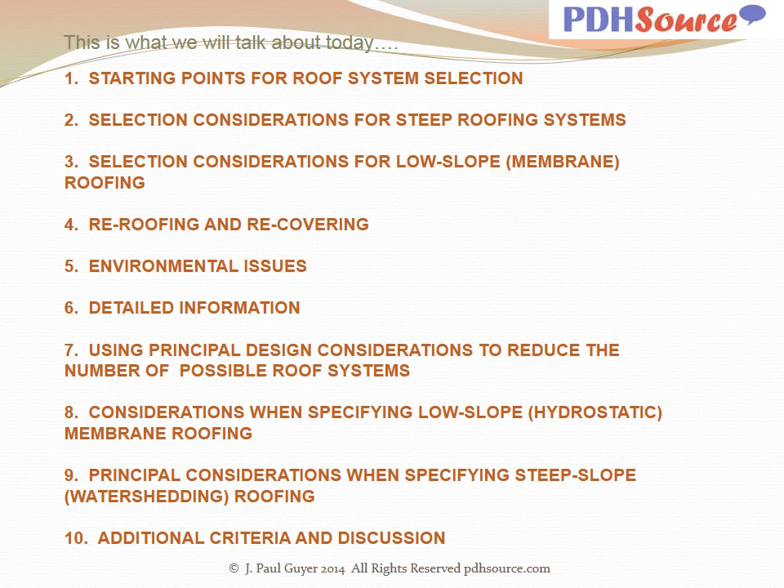By way of introduction, this is a little bit about me and what I've been doing for the last few decades. For 35 years, I was what I characterize as a straight-ahead designer, cranking out drawings and specifications for buildings and related infrastructure. I got registered in a few things along the way. And for an additional 9 years after that, I was in the public policy area as a principal staff advisor to the California legislature on capital outlay and infrastructure issues.

This discussion is intended to introduce the major considerations in selecting a roofing system. Figure 1, which you will see in a moment, depicts the various alternative roofing systems and how they relate. When commencing the selection process, there are two different starting points. Figure 1 indicates the decision process for arriving at the best roofing solution for your building.

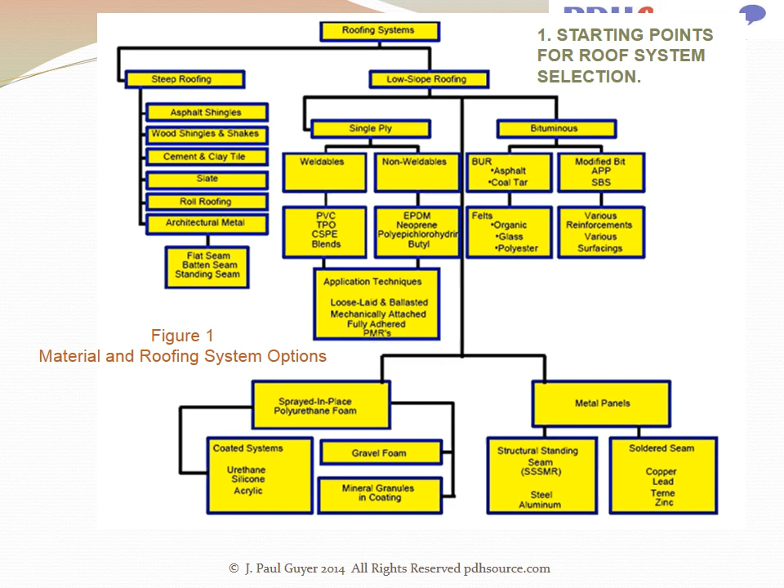There can be an issue, of course, whether you're talking about new roofing or re-roofing. The roof may be part of a new building design, or it may involve the re-roofing of an existing structure, either replacement or recovering.

Today, approximately 75% of roofing activity is re-roofing. In new construction, the designer is very likely to have a preconceived notion as to whether a highly visible sloped roof is wanted or whether a less visible low slope roof design is acceptable.

Positive drainage is a very important design criterion. When re-roofing, it may be feasible to improve drainage by using tapered insulation or sloped deck fills.

Table 1 evaluates common steep roofing systems based upon some use criteria. Steep roof systems make a strong visible statement about a building. The texture, shadow line, and color are major factors in selection. Steep roofs function by shedding water rather than by being waterproof. Figure 2 - minimum slopes, as shown in Table 13, are required in order to ensure proper drainage.

Major categories of steep roofing include asphalt shingles, wood shingles and shakes, tile, slate, architectural metal, asphalt roll roofing, and fabricated units of metal or plastic intended to look like the others. Only asphalt roll roofing and asphalt or wood shingles may be recovered.

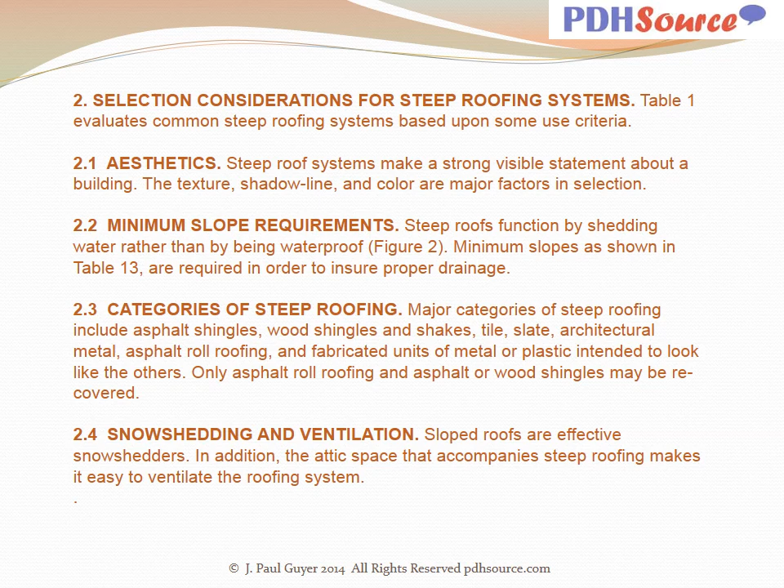Sloped roofs are effective snow shedders. In addition, the attic space that accompanies steep roofing makes it easy to ventilate the roofing system.

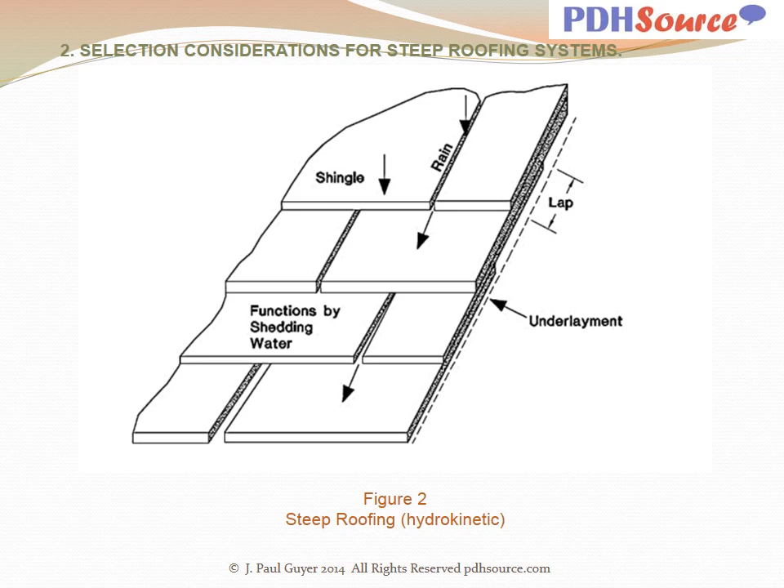Figure 2 indicates a typical steep roofing system, sometimes characterized as hydrokinetic. Figure 3 also indicates a low slope roofing system, commonly or sometimes characterized as hydrostatic.

Sloped roofs in general require less maintenance than flat roofing systems. When considering re-roofing a flat roof, it may be possible to convert the low slope roofing system to a steeply sloped roof. This may improve the appearance of the building while resolving drainage problems as well. Steep roof conversions are a viable option for relatively narrow buildings.

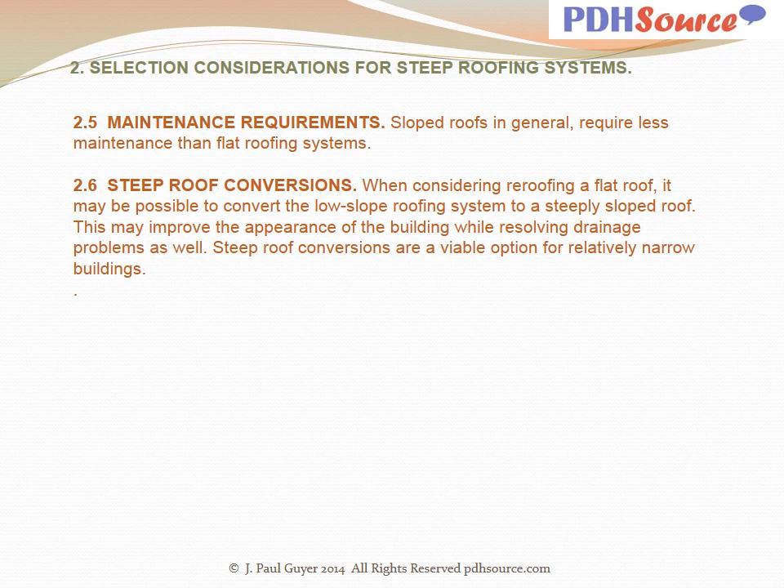Membrane roofing is typically used on commercial buildings where the minimum slopes required by steep roofing render them impractical for larger buildings. Low slope membrane systems are completely sealed at laps and flashings, figure 3, and can temporarily resist standing water conditions. Choices for membrane roofing include multi-ply bituminous built-up, abbreviated sometimes BUR, polymer modified bituminous, MB, elastomeric single-ply systems, EPDM, thermoplastic single-ply systems, PVC or TPO, sprayed in place polyurethane foam, SPF, and some metal, hydrostatic low slope SSSMR systems.

Designers frequently select low slope roofs when the roof is expected to accommodate rooftop equipment. With the exception of foam and metal, all low slope systems can be incorporated into protected membrane roof designs.

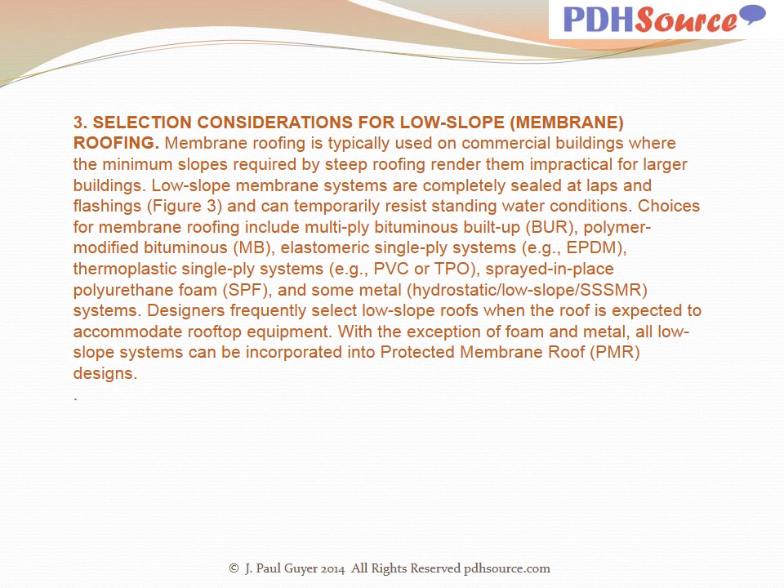The term replacement is used when the existing roofing system is to be either partially or totally removed and a new system installed. The designer should consider any existing problems and whether drainage and thermal performance needs to be improved. Existing surfaces such as walls and curbs may be contaminated with bitumen, which might affect compatibility with some re-roofing options.

Additional concerns as compared to new roofing include whether the existing structure can handle a significantly heavier roof system and whether construction activities of the re-roof system will affect the occupants of the building, such as fumes, falling debris, and noise.

The term recover is used when a new roofing system is to be superimposed directly over an existing system. In this case, underlying conditions are obscured, making assessment of their condition more difficult. Additional concerns include how the recover system will be attached to the existing membrane or roof deck and compatibility with the substrate. The potential for trapped water between the old and new membrane may suggest the use of venting base sheets and/or roof vents.

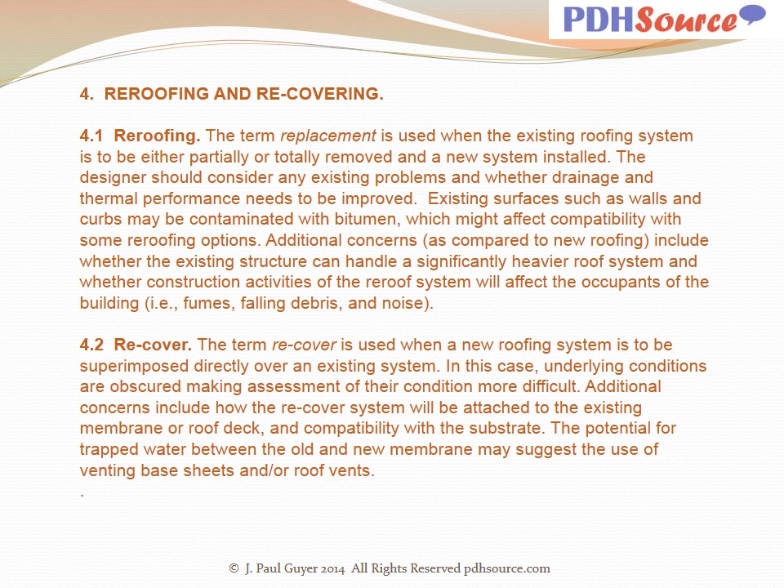A relatively new design criterion is whether the roof system under construction meets green criteria, such as whether the system incorporates post-consumer waste or is itself recyclable at the end of its useful life.

Roof system waste is bulky and puts a great strain on waste disposal sites. Energy efficiency is also important in terms of raw materials acquired, production of finished goods, and application of the roof system. Thermal performance in service and retention of thermal value with age are equally important.

A sustainable or robust roof is highly desirable as extension of the life of the roof contributes to overall conservation. High albedo, that is, reflective roofs, may improve localized climate conditions.

The felt used in asphalt organic shingles consists primarily of recycled waste paper, wood chips, and sawdust. Asphalt itself is a byproduct of petroleum refining. Wood fiber and perlite roof insulation contain waste paper.

Glass fiber and asphalt organic shingles have been recycled into asphalt curbing and the like. Wood shingles and shakes can be recycled into garden mulch. Steel and aluminum contain recycled scrap, and at the end of their life, metal panels can be recycled back into scrap.

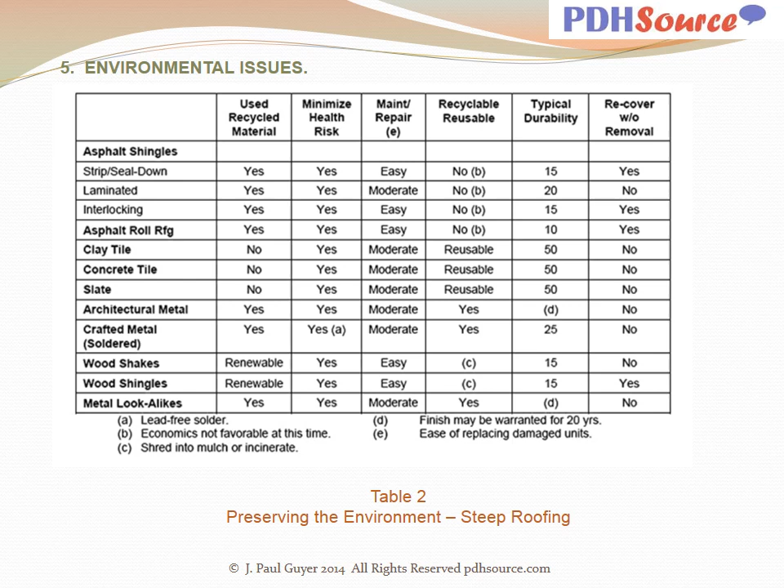Table 2 provides a comparison of environmental issues for different types of steep roofing systems. And Table 3 provides a comparison of a variety of low slope roofing systems and environmental issues of concern.

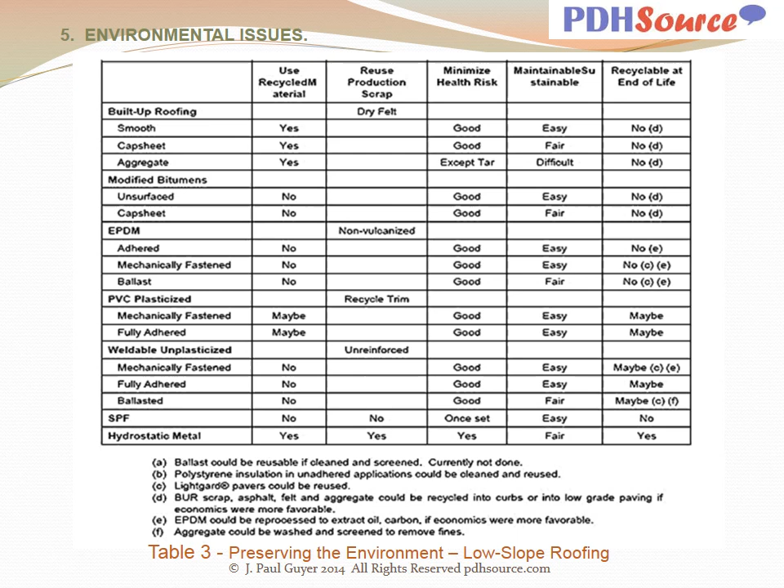Once a tentative roofing system selection has been made using information provided by this discussion, detailed information is developed.

Tables 4 and 5 list some of the principal design considerations in roof system selection. An explanation of the headings follows the tables. These tables are not all-inclusive but contain many criteria that the designer can consider to reduce the myriad of choices.

Systems that fail to meet the principal project design criteria can be quickly disqualified from further consideration. For example, if an existing structure has reached its design load limit, then heavier roofs, such as ballasted single-ply roofs or concrete tiles, would have to be disqualified, or the structure would have to be strengthened at significant cost.

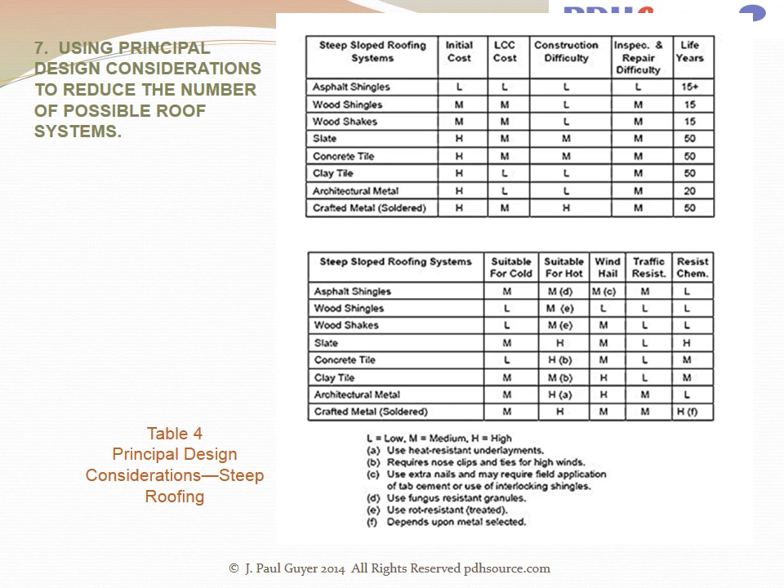The initial cost may include materials, labor, and special setup for construction. Initial cost may determine if the roof, as designed, is affordable. Perhaps a somewhat less expensive system should be considered if it does not incur significantly increased maintenance cost or have a shortened life. Life cycle cost considers durability, but also presumes that routine maintenance will be performed to achieve the projected life.

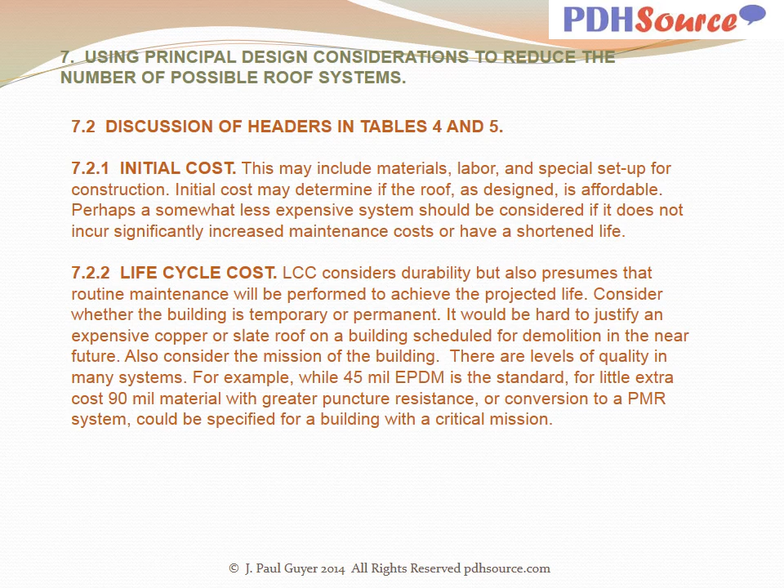Consider whether the building is temporary or permanent. It would be hard to justify an expensive copper or slate roof on a building scheduled for demolition in the near future. Also consider the mission of the building. There are levels of quality in many systems. For example, while 45 mil EPDM is the standard, for little extra cost, 90 mil material with greater puncture resistance or conversion to a PMR system could be specified for a building with a critical mission.

Some systems require more clearance to accommodate application methods and equipment. Large prefabricated roof sheets, 50 feet by 200 feet, may be fine on a large roof with few penetrations, but are impractical on a roof area that is broken up by many curbs and equipment supports.

On multiple penetration surfaces, relatively narrow sheets, i.e. BUR, MB, thermoplastic, single ply, or sprayed in place polyurethane foam should be considered.

Penetrations through standing seam metal roofing need to accommodate the expected thermal movement of the metal panels. Thermal movement is cumulative, increasing with distance from the point where the panels are restrained, which is typically the eaves.

Penetrations in standing seam metal roof panels must pass through the flat portion of the panel, not through the standing seam. Penetrations wider than a single panel require a diverter to carry water around the obstruction. Water must flow parallel to the raised seams, never over them.

Some roof systems require periodic recoating for weather protection. Aggregate surfaced roofs are more difficult to inspect and patch than smooth surfaced roofs.

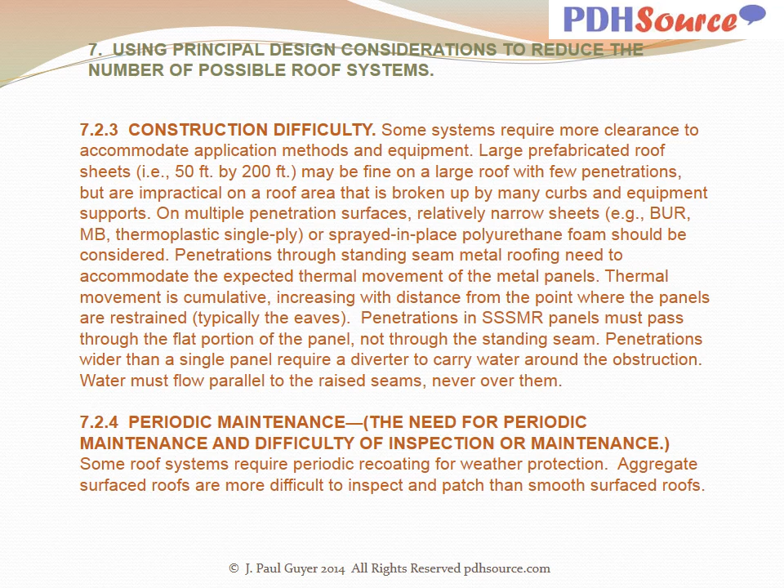A mean life is listed, but the actual life is affected by drainage maintenance and extreme use or abuse. Consider the effects of freeze-thaw, hail, ice scrubbing, and traffic while cold, such as snow removal. Some materials embrittle dramatically at low temperatures, meaning they have a relatively high glass transition temperature. Others may embrittle as they weather and lose plasticizer, or are degraded by ultraviolet or thermal loads.

H indicates highly suitable, L indicates less suitable. Effects of thermal expansion and algae growth are considered in the suitability ratings for extremely hot or humid conditions, with H indicating suitable and L indicating less suitable.

With regard to wind resistance, roofs are vulnerable to wind scour and blow-off. While arbitrary ratings are provided in the tables, resistance is affected by building height, terrain, parapet height, and measures taken to upgrade perimeter and corner attachment. In the tables, H indicates highly wind resistant when properly designed.

For membrane roofing, impermeable roof decks such as cast-in-place concrete are best. Air retarders are needed with loose-laid and mechanically fastened single-ply systems, as they may otherwise balloon from interior air leakage. Perimeter wood blocking must be well anchored to prevent peeling of the membrane or loss of fascia metal.

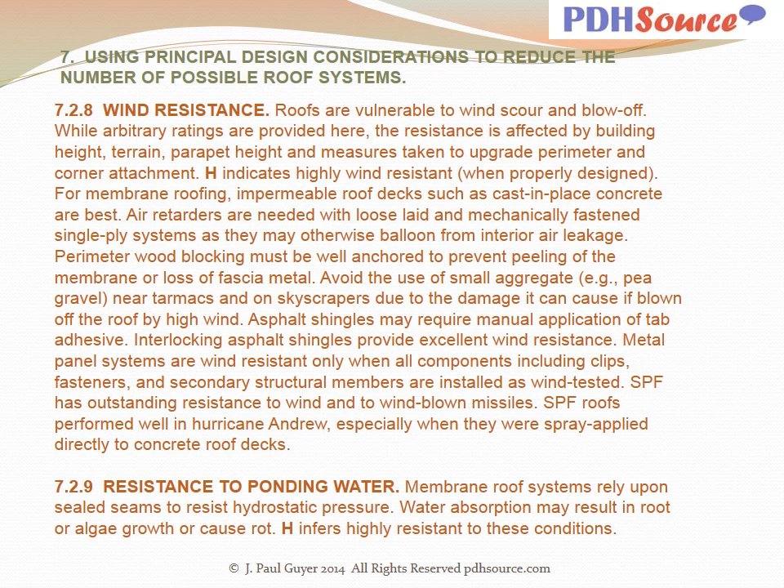Membrane roof systems rely upon sealed seams to resist hydrostatic pressure. Water absorption may result in root or algae growth, or cause rot. In the tables, H refers to systems highly resistant to these conditions.

Roofs that have a lot of rooftop equipment will have foot traffic that can cause punctures or abrasion. Most roof systems are available with traffic protective overlays, such as walkways. In the tables, H indicates systems highly resistant to abuse, assuming protective courses have been applied.

With regard to resistance to chemicals, including oils, fats, grease, and metal ions, some roof surfaces are vulnerable to exhaust fumes or liquids. Thermoplastic polyolefins (TPOs) and hypalons (CSPE) may be better than bituminous materials in resistance to oils, greases, and solvents. Copper-containing runoff water from condensate coils or flashings will corrode zinc and zinc-aluminum SS-MR roofing. In the tables, H indicates better than average resistance to attack.

Consider the total number of roofs already installed, the weight of the proposed roof system, and possible construction loads. The unit weight of membrane systems varies dramatically, ranging from less than 0.5 pounds per square foot for 2-inch thick SPF roofing, to more than 20 pounds per square foot for ballasted single-ply systems. Typical roof system weights and construction loads are shown in Table 6.

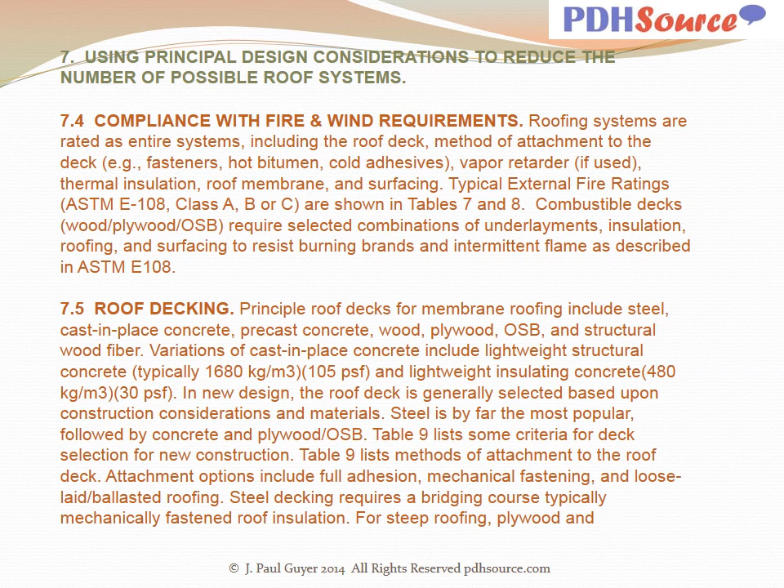Attachment options include full adhesion, mechanical fastening, and loose-laid ballasted roofing. Steel decking requires a bridging course, typically mechanically fastened roof insulation. For steep roofing, plywood roof decks are most common. They generally utilize flexible batts as under-deck roof insulation, although architectural metal and cathedral ceiling constructions may use rigid insulation above the deck.

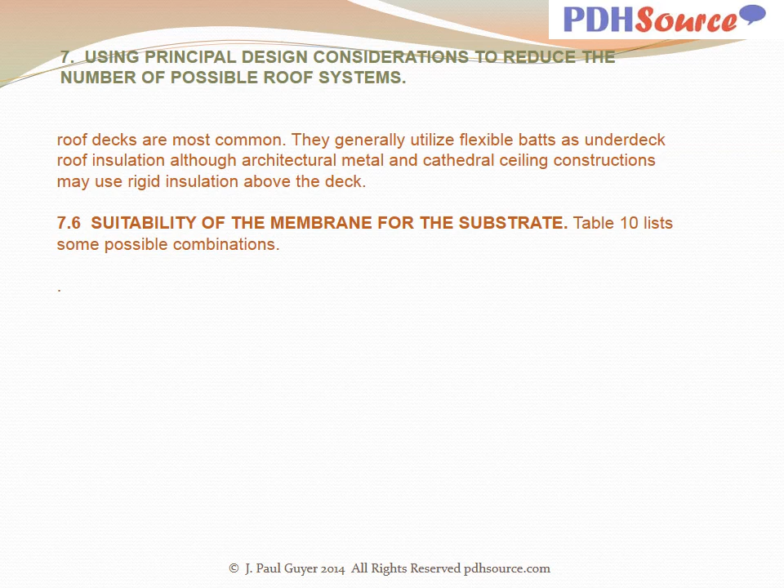Table 10 lists some possible combinations of suitability of the membrane for the substrate. Table 6 indicates typical weights of roofing materials and equipment.

Table 7 indicates fire ratings and required underlayments for steep-sloped roof systems. The roofing systems are indicated in the first column, the ASTM E108 class in the center column, and the underlayment in the column on the right.

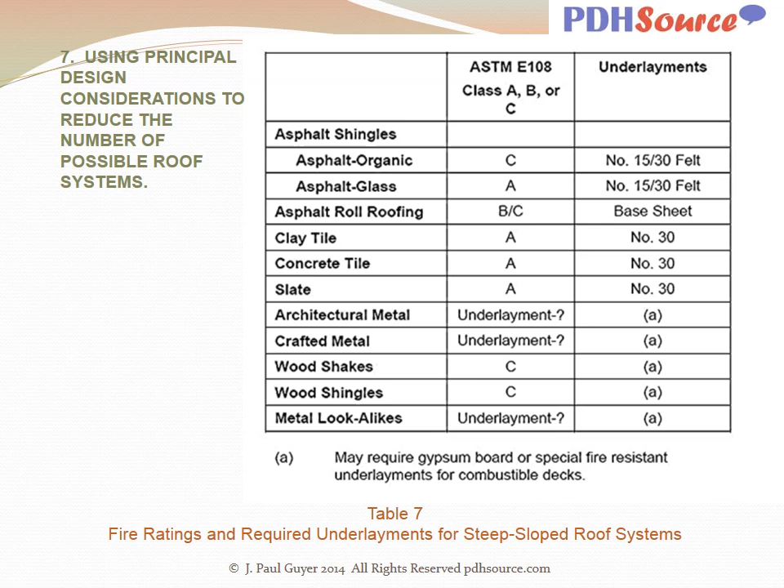Table 8 provides fire ratings and required underlayments for low-slope roof systems. The roofing systems are indicated in the first column on the left, the ASTM E108 ratings in the second column for combustible decks, and in the third column for non-combustible decks, with the deck construction indicated in the column on the right.

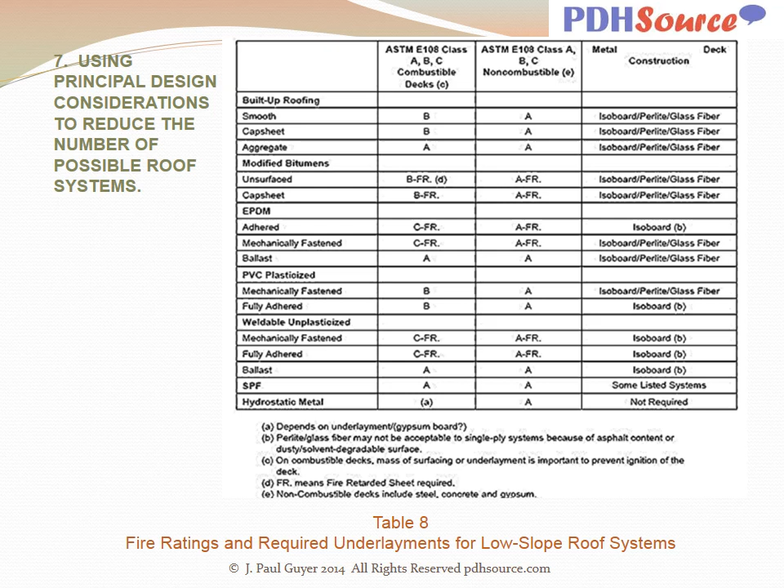Table 9 indicates the suitability of roof decks for various conditions: economy, long spans, resistance to heavy roof traffic, seismic, internal fire resistance, external fire resistance, and wind resistance. The roof decks considered are in the first column on the left, with qualitative ratings ranging from excellent down to poor.

Table 10 indicates membrane substrate compatibility and attachment methods.

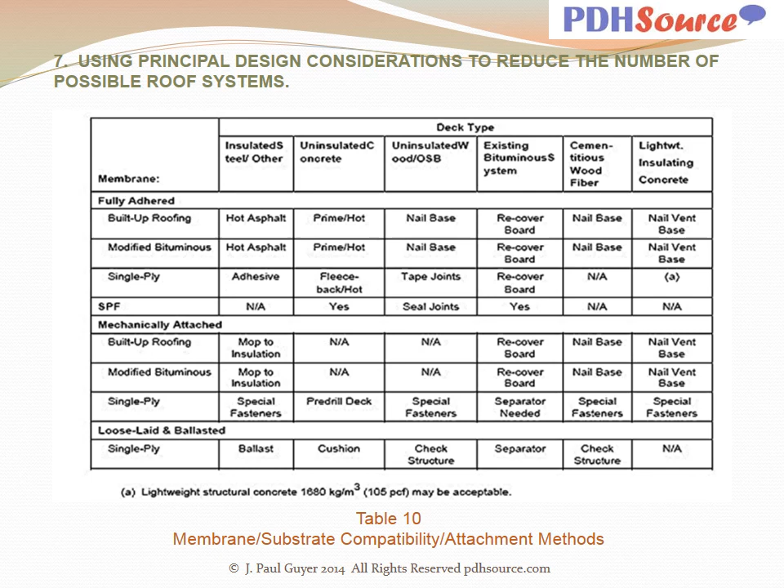Rigid thermal insulations used under membrane roofing include wood fiber, perlite fiber, glass fiber, foamed glass, polystyrene (either extruded or expanded), and polyisocyanurate isoboards. Non-structural thermal insulations include glass fiber and mineral wool batts, and blown loose insulations such as cellulose fiber, glass fiber, mineral fiber, and expanded vermiculite.

Table 11 indicates the suitability of rigid roof insulations for membrane roofing based upon the intended method of use.

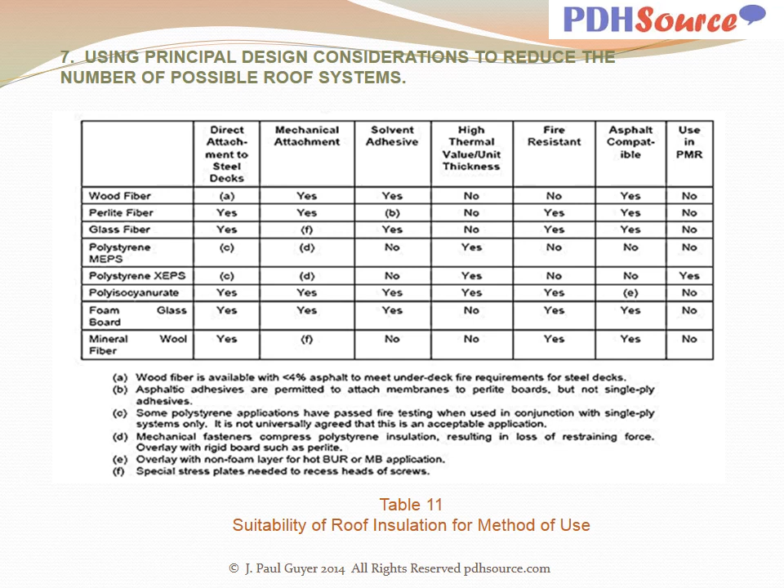If thick layers of insulation are needed to meet a high thermal resistance, thicker wood nailers and deeper fascia metal will be required. Foam plastics such as polyisocyanurate and polystyrene have the highest R-values per unit thickness.

In standing seam metal roof systems, the permissible thickness of blanket insulation may be limited by the clearance provided by the supporting clip design. Blanket insulation used in steep roofing systems is frequently placed on the floor of the attic, where R-values of 30 or more may be possible.

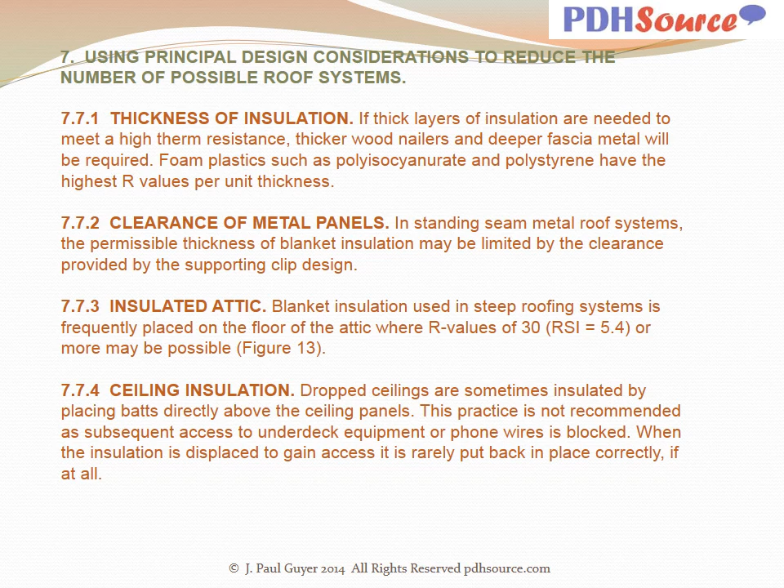Drop ceilings are sometimes insulated by placing batts directly above the ceiling panels. This practice is not recommended, as subsequent access to under-deck equipment or phone wires is blocked. When the insulation is displaced to gain access, it is rarely put back in place correctly, if at all.

With regard to suitability for extreme climates, protected membrane systems (PMRs) are very well suited to extremely cold climates and have been successfully used in all climates.

For extreme conditions of snow and ice, a cold, ventilated roof should be considered. For most steep roofing, this is achieved by allowing a flow of outdoor air between the insulation and the roofing deck. This air cools the roof in summer, dries out any moisture that condenses in the roof, and greatly reduces the formation of icicles and ice dams along the eaves.

For regions prone to severe hail, ballasted EPDM roofs are very good and PMRs are excellent. Tile, shingles, and bare BUR and metal systems are easily damaged by hail.

In regions of semi-tropical climate with high temperatures and humidity, asphalt shingles should be treated to be fungus resistant, and wood shakes and shingles should be pressure treated for rot resistance.

Most membrane systems are difficult to install in sub-freezing weather. If frequent precipitation during construction is a problem, factory fabricated single-ply systems with field-welded seams may have advantages over systems where field application of adhesives or hot bitumen is needed. Torch-applied modified bitumens are one of the few systems that can be applied, albeit slowly, in wet, windy conditions.

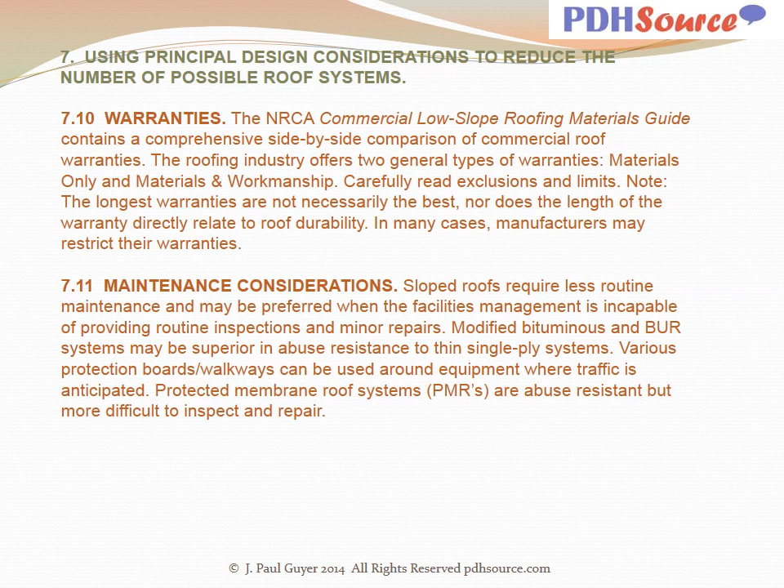Various protection boards and walkways can be used around equipment where traffic is anticipated. Protected membrane roof systems are abuse resistant but more difficult to inspect and repair.

There may be issues of roof access, fumes, and property protection when re-roofing. With regard to fumes, those from kettles and solvents may be objectionable. Hot coal tar pitch is especially objectionable.

Hot asphalt is also noticeable but less noxious. Cold applied systems with taped or welded seams and metal roof systems generate few odors. It may be necessary to coordinate air conditioning shutdown to avoid taking fumes into the occupied building. If the area around the construction site is congested, it may make heating and hoisting of roofing materials difficult.

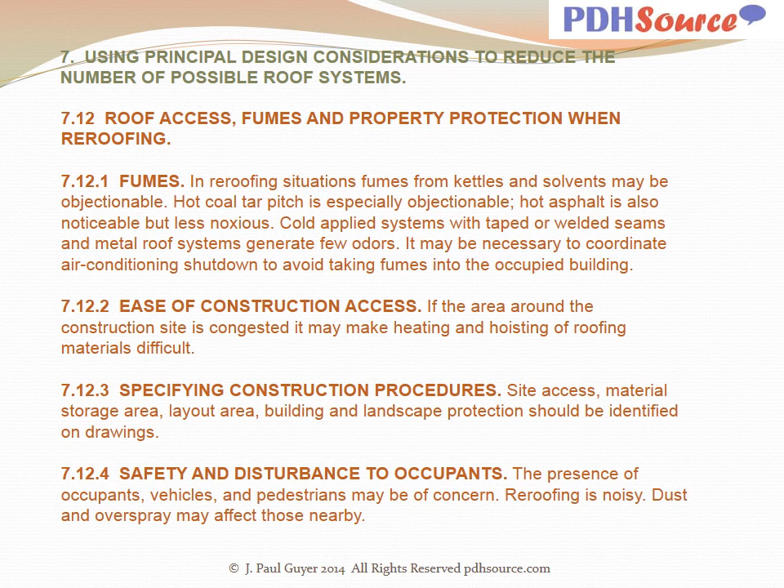Site access, material storage area, layout area, building, and landscape protection should be identified on drawings. The presence of occupants, vehicles, and pedestrians may be of concern. Re-roofing is noisy, and dust and overspray may affect those nearby.

Roofing requires skilled installers. Qualified contractors and inspectors are more likely to be available if the system is customarily used in the region. It should be determined whether there are several manufacturer-approved installers capable of bidding the work. Verify that the contemplated system is acceptable to the owner, occupants, and maintenance personnel.

With the exception of SSSMR, membrane roofing requires a suitable roof deck. Most constructions will also use thermal insulation. Vapor retarders are sometimes required to protect the roofing system from attack by moisture from the interior.

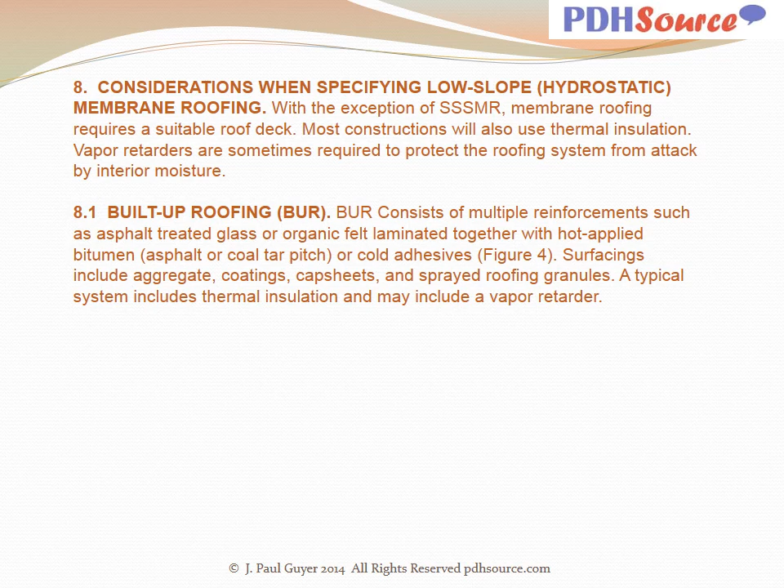Built-up roofing, BUR, systems consist of multiple reinforcements such as asphalt-treated glass or organic felt laminated together with hot-applied bitumen, asphalt or coal tar pitch, or cold adhesives. See Figure 4. Surfacings include aggregate coatings, cap sheets, and sprayed roofing granules. A typical system includes thermal insulation and may include a vapor retarder.

MB, polymer modified bitumen, consists of reinforced sheets factory coated with polymer modified bitumen. They may be laminated in the field using hot bitumen, heat fusion, or by cold adhesives. Refer to Figure 5. Surfaces include cap sheets with mineral granules, metal foil, and field-applied coatings.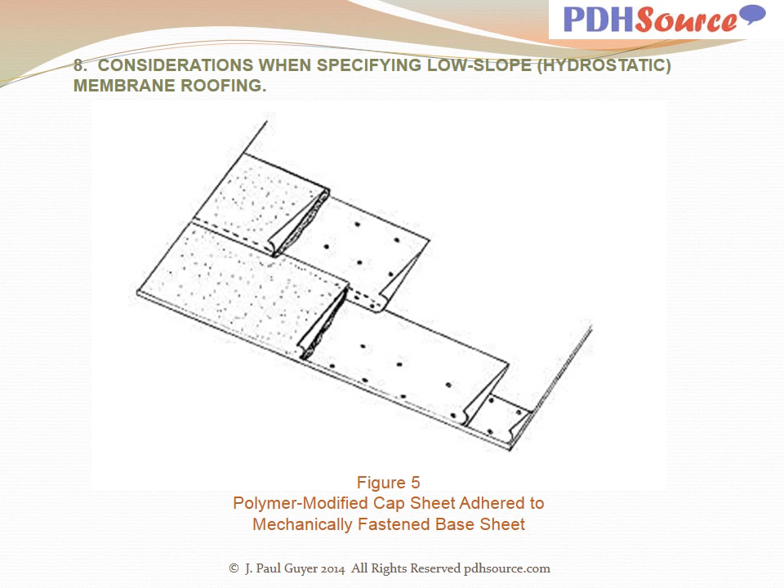Elastomeric single-ply membranes consist of a factory-produced sheet, generally of EPDM rubber, with seams field sealed with adhesive or tape. Refer to Figure 6. Sheets are unsurfaced unless ballast is used. Elastomers are vulcanized, thermoset, and usually non-reinforced except when used in mechanically fastened systems.

A fleece-backed sheet is also available for fully adhered systems when it is desired to use hot bitumen as an adhesive, for example, for recovering an asphalt-contaminated deck or old built-up roofing system, BUR. Figure 6 indicates a typical EPDM roof system.

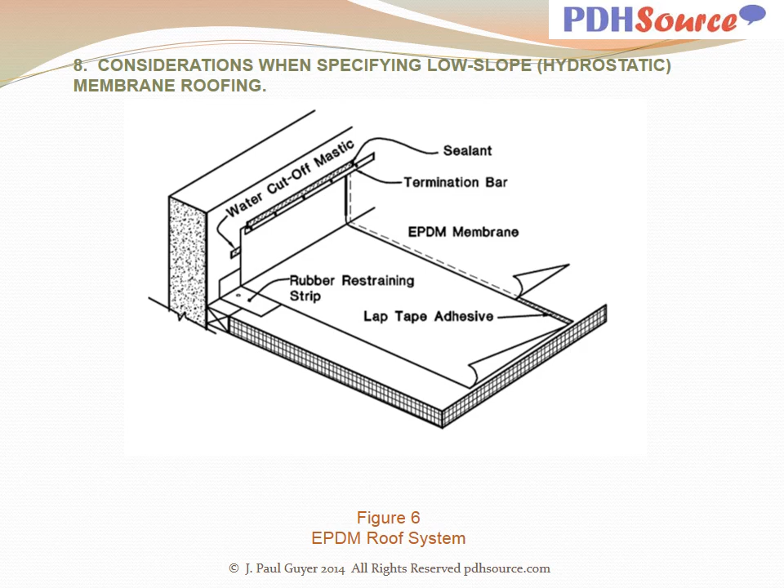Figure 7 indicates a typical PVC roof system.

Weldable thermoplastic membranes consist of a sheet of reinforced thermoplastic material such as PVC or TPO. Sheets are unsurfaced or ballasted. Seams are generally heat fused, although solvent welding and adhesive bonding are also possible. Refer to Figure 7.

Structural standing seam metal roofing, SSSMR, consists of metal panels with raised seams more than 1.5 inch high. Refer to Figure 8. Sealants are utilized at side seams and end laps to provide waterproofing.

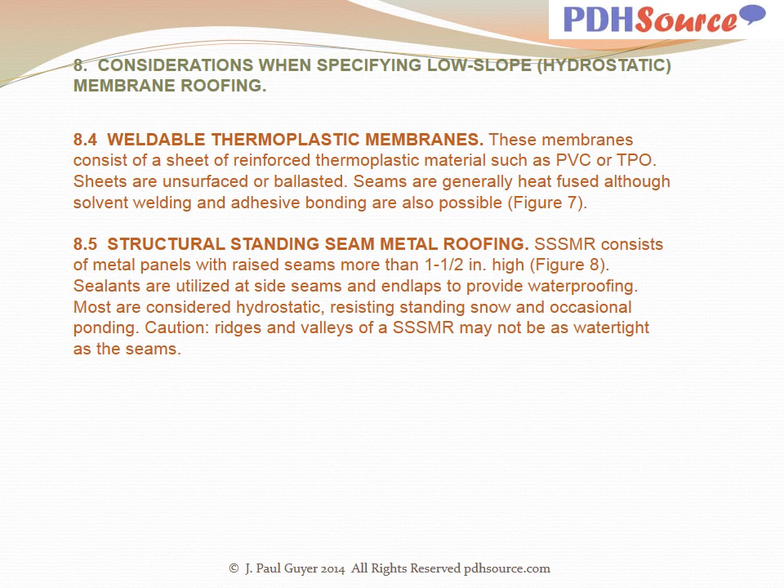Most are considered hydrostatic, resisting standing snow and occasional ponding. A word of caution: ridges and valleys of structural standing seam metal roofing may not be as watertight as the seams. Figure 8 indicates typical structural standing seam metal roofing systems.

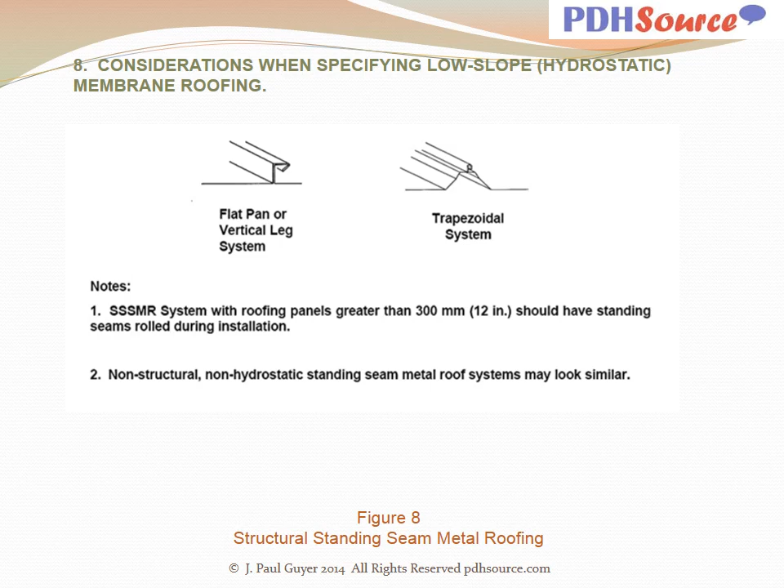SPF, sprayed-in-place polyurethane foam systems, is a thermoset rigid foam field formed by the reaction of liquid components in the presence of a foaming agent sprayed onto the substrate. SPF is protected by liquid applied elastomeric coatings or an application of loose gravel on slopes less than 4%. Figure 9 indicates the typical elements and components of membrane roofing systems.

The components of membrane roofing systems: first, the deck, which supports the roofing loads and is selected to conform to fire-resistant design classifications. Not all systems require a deck, for instance, structural standing seam metal roofing.

A vapor retarder protects the insulation against moisture vapor attack from the warm, high vapor pressure side of the roof assembly. Not all buildings require a vapor retarder. An air barrier prevents air movement, infiltration, and exfiltration through the roofing system.

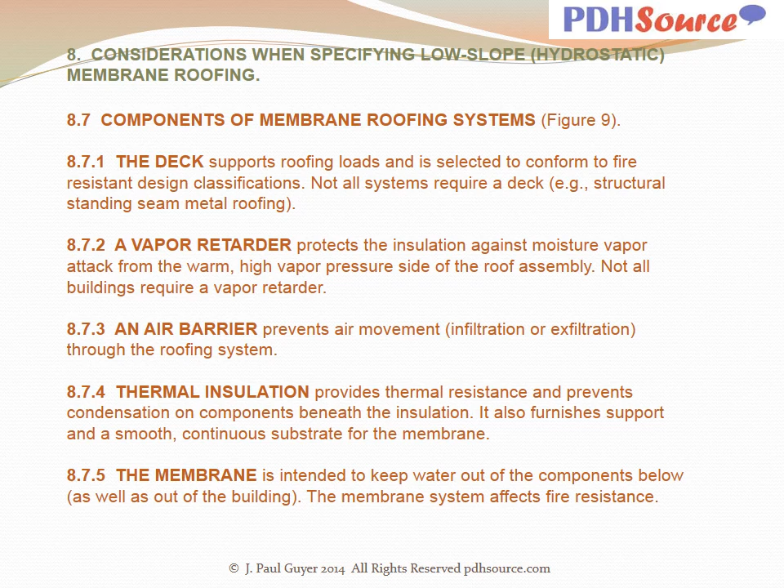Thermal insulation provides thermal resistance and prevents condensation on components beneath the insulation. It also furnishes support and a smooth, continuous substrate for the membrane. The membrane is intended to keep water out of the components below as well as out of the building. The membrane system affects fire resistance.

Individual roofing components may be held in place by adhesives, fasteners, ballast, or a combination of these methods. Perimeter flashings are waterproof vertical terminations of the membrane. Refer to Figure 10.

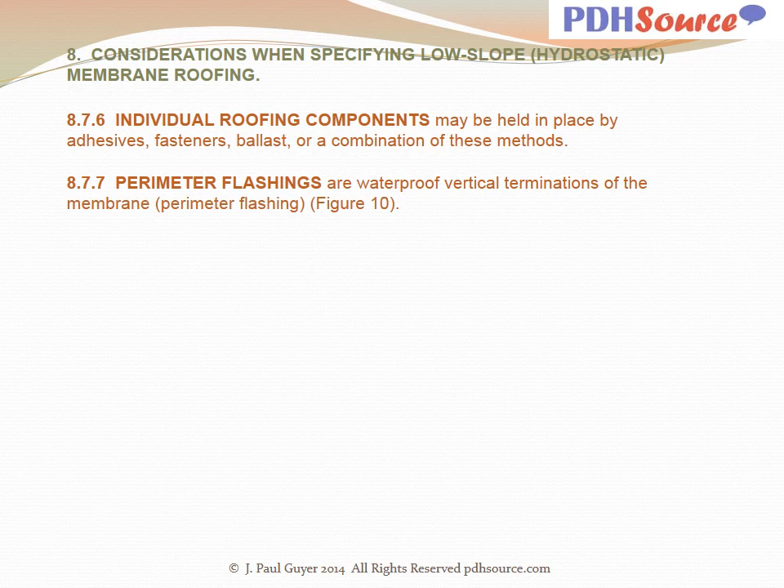Figure 10 indicates representative wall base and cap flashing. Roof edging and fascia are usually low profile roof edge terminations and side trim. Roof penetrations include drains, vents, curbs, equipment supports, and the like. Surfacing materials screen UV light, improve fire ratings, and may improve water and/or hail resistance.

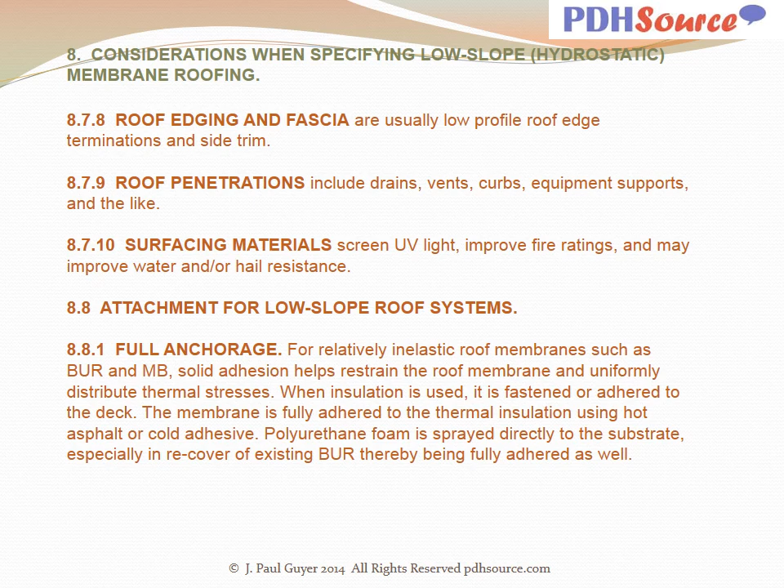With regard to attachment for low-slope roof systems, first, full anchorage. For relatively inelastic roof membranes such as BUR and MB, solid adhesion helps restrain the roof membrane and uniformly distribute thermal stresses. When insulation is used, it is fastened or adhered to the deck. The membrane is fully adhered to the thermal insulation using hot asphalt or cold adhesive. Polyurethane foam is sprayed directly to the substrate, especially in recover of existing BUR, thereby being fully adhered as well.

In partially attached systems, the membrane is mechanically anchored through the insulation into the deck, or in a few cases, partially adhered with strips or spots of adhesive. This is common with flexible single-ply roof membranes. Fasteners are typically placed in the seams area where it can be covered by the overlapping sheet.

For loose laid systems, the membrane is unattached to the substrate and is held in place by ballast. Restraint is required only at perimeters and curbs. Loose laid roofs are used with elastomeric EPDM systems and some thermoplastic TPO systems. These are very inexpensive roof systems if the structure can handle the ballast weight. A word of caution: in positive pressure buildings, air barriers should be used with loose laid and partially attached membranes to avoid billowing and peeling.

With regard to labor costs, the labor costs are highly intensive with the BUR and MB systems, highly intensive with the structural standing seam metal roof systems. The system is very unforgiving of installation defects, however. Medium intensity systems are fully adhered and mechanically fastened single ply, and low intensity from the standpoint of labor is spray foam, which requires the smallest crew but is the most machine intensive and weather sensitive.

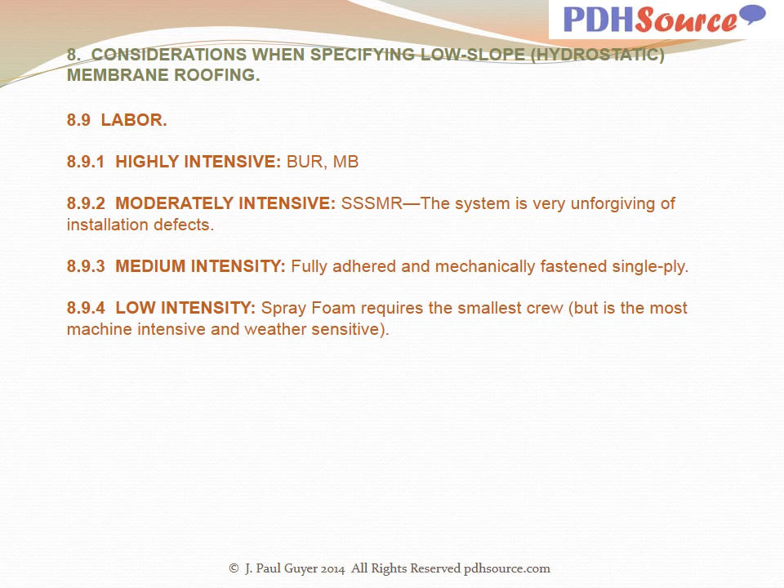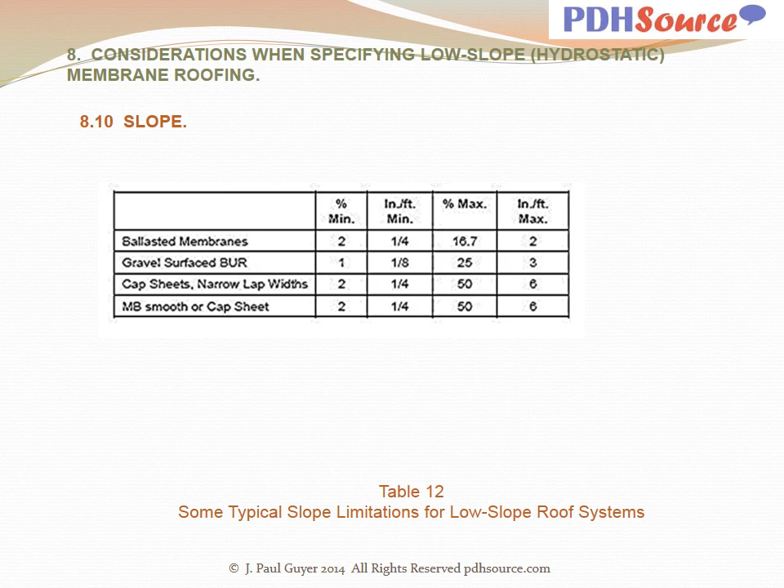With regard to principal considerations when specifying steep slope, water shedding roofing, this category covers systems that range from asphalt shingles, wood shingles and shakes, clay and concrete tiles, slate and metal lookalikes. Also included are architectural metal panels with a variety of seams, referred to Figure 11. Slopes are generally 25%, 3/12 or greater. Most must be continuously supported on a solid deck, for example plywood or oriented strand board, OSB.

However, some varieties, clay and concrete tiles, may be supported on spaced horizontal batten boards. Underlayments such as roofing felt, self-adhering MB, or plastic film are usually required over the entire roof to provide a secondary line of defense against driving rain and blowing snow. In cold regions, a completely sealed MB underlayment is needed along eaves, in valleys, and at dormers, skylights, chimneys, and such to resist leaks from water ponded behind ice dams.

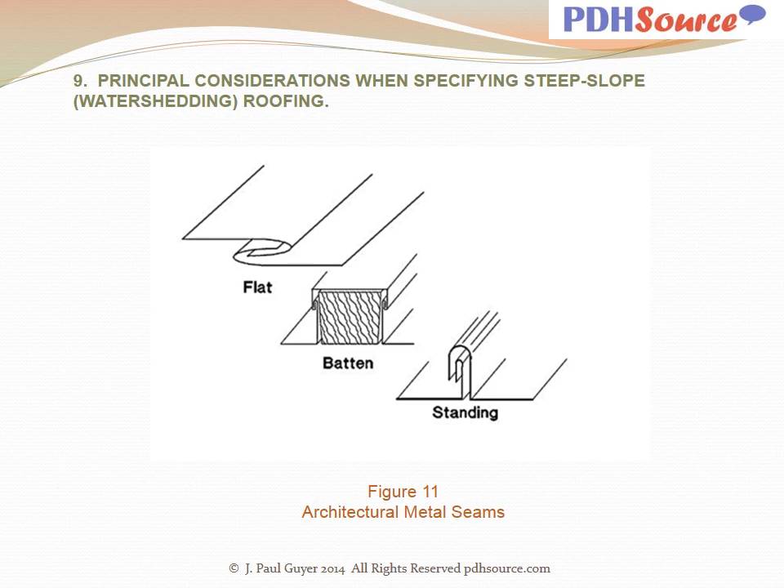With regard to aesthetics, by their very nature, steep roofing is highly visible. Appearance may be of primary concern to the designer. Regional preferences exist. For example, red tile roofing is very common and highly desirable in the Southwest, while light gray concrete tile is preferred in Florida. Wood shakes give a textured, natural look preferred in the Pacific Northwest. Labor intensity and labor skill.

High intensities are heavy brittle units of clay, tile, or slate. Medium intensity of labor is architectural metal and wood shakes, and then low intensity is shingles.

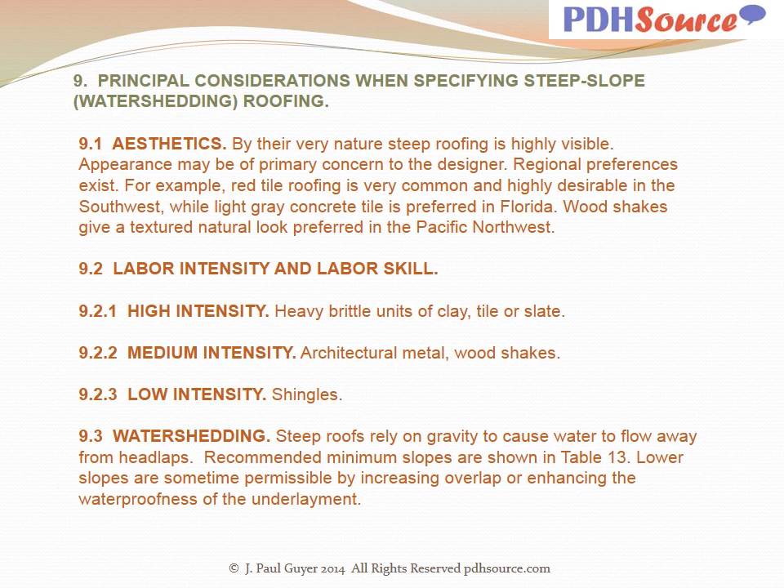Valleys must be well constructed. The slope of a valley will be less than that of the intersecting planes that form it. Exterior drainage over the roof edge or to a gutter is typical, but may be troublesome in cold regions since ice dams may form there.

Sealed underlayments of self-adhering modified bitumen are typically used along the eaves to at least 24 inches beyond the interior wall line, refer to Figure 12A, and as valley lining. Occasionally, the entire roof deck is covered with such a membrane. Note that this can lead to problems if indoor moisture is not isolated from the roof by well-made vapor and air barriers. Underlayments are used in steep roofing as a secondary defense against water penetration.

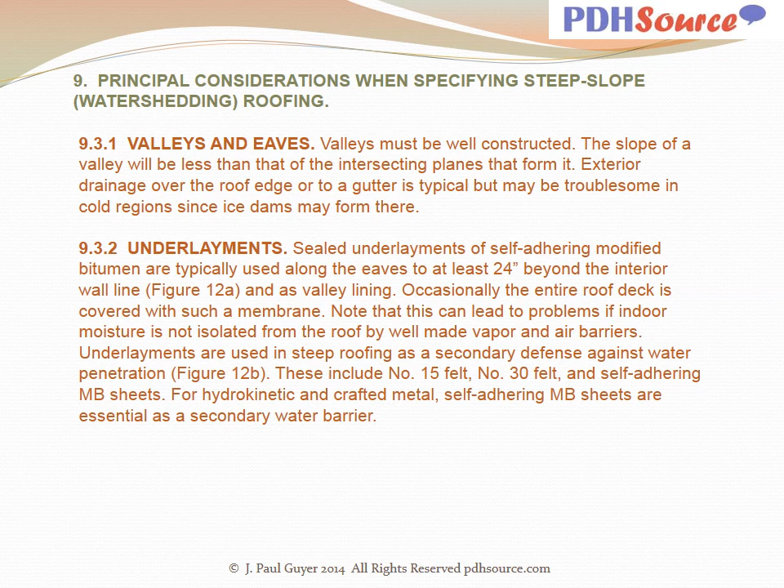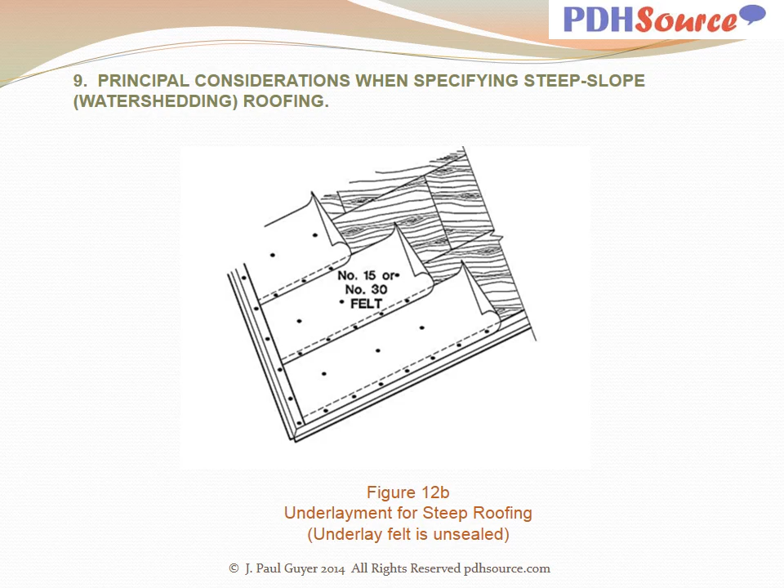Steep roofs generally cover an attic space, refer to Figure 2-13, with the exception of cathedral ceilings. The floor of an attic can be inexpensively insulated with non-structural insulations such as fiberglass batts, mineral wool, and expanded vermiculite or treated cellulose. Where the thickness of the insulation is not limited by clearance problems, very high thermal resistances, i.e. R30, can be achieved.

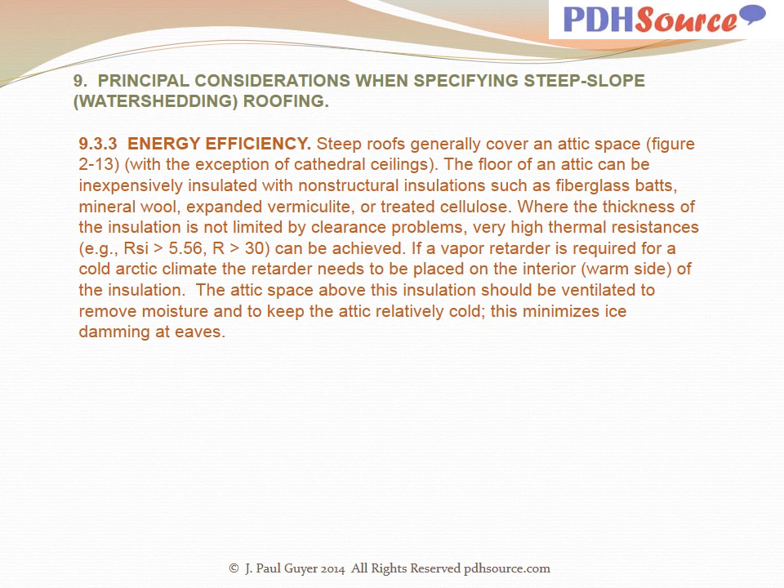If a vapor retarder is required for a cold Arctic climate, the retarder needs to be placed on the interior warm side of the insulation. The attic space above this insulation should be ventilated to remove moisture and to keep the attic relatively cold. This minimizes ice damming at eaves.

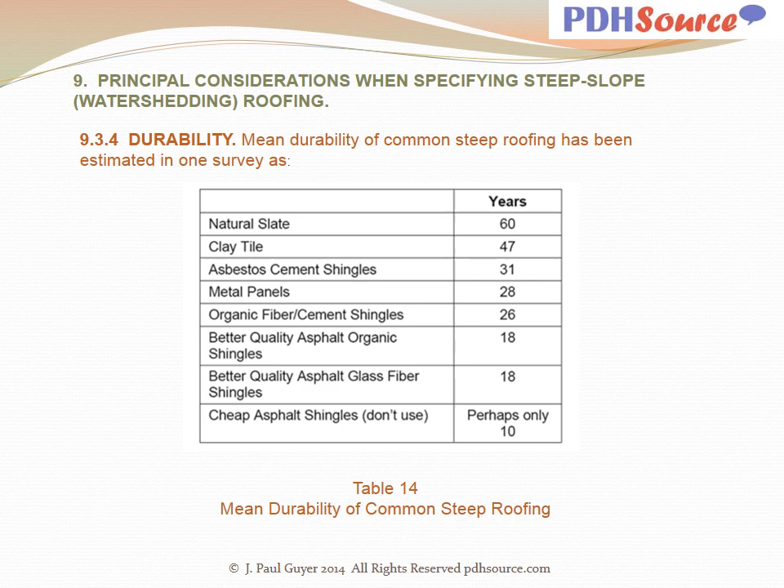Maximum wind speeds associated with locality and storm type determine the needed wind resistance. ANSI/ASCE 7-95, and others provide design information.

Air impermeable roof decks such as poured concrete with adhered or mechanically fastened insulation and fully adhered membranes are highly wind resistant. Tests conducted by the Factory Mutual system have determined that BUR systems installed this way have resisted 180 PSF.

Metal panels are generally rated by the Underwriters Laboratories UL 580 procedure, with UL 90 ratings considered excellent. However, because some SSS-MR panel systems with UL 90 ratings have failed in service, structural standing seam metal roof systems must pass the ASTM E1592 test method.

Ballasted single-ply systems rely on heavier and larger ballast in more wind-prone exposures. SPRI has developed wind guidelines in their ANSI SPRI RP4 document based upon ANSI/ASCE 7-95 guidelines. Higher parapets have a beneficial effect on ballasted systems. Above certain building heights, SPRI recommends against the use of ballast.

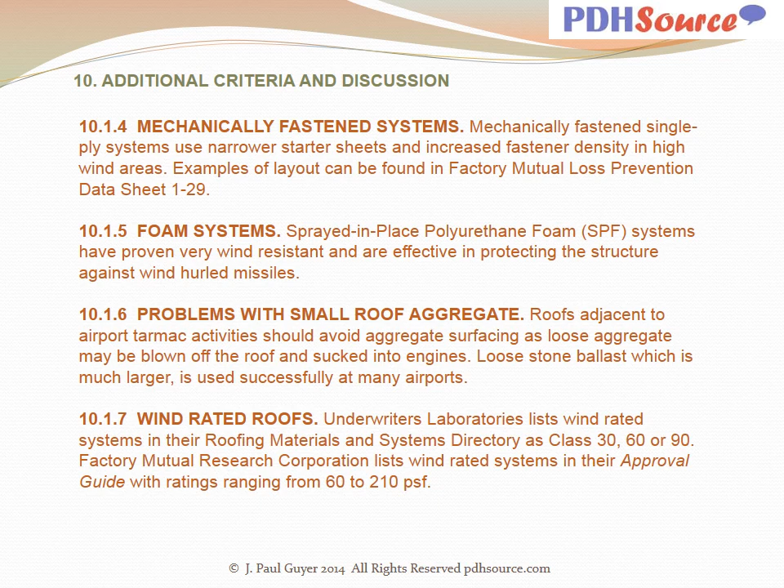Underwriters Laboratories lists wind-rated systems in their roofing materials and systems directory as class 30, 60, or 90. Factory Mutual Research Corporation lists wind-rated systems in their approval guide with ratings ranging from 60 to 210 pounds per square foot.

For most steep roofing systems, additional fastening is required for high wind areas, that is, 6 fasteners per asphalt shingle instead of 4, addition of nose clips for tiles, etc.

The formation of ice can cause the roof membrane to split. Ice can also affect roofing performance by scrubbing the membrane and eroding the surface. This can be especially detrimental to materials with a relatively high glass transition temperature. Bituminous materials have a TG of approximately 32 degrees Fahrenheit.

Modified bituminous materials with an SBS modifier can have a TG as low as minus 30 degrees Fahrenheit. EPDM membranes report a TG less than minus 40 degrees Fahrenheit. The TG of thermoplastics may increase with age, that is, loss of plasticizer in PVC.

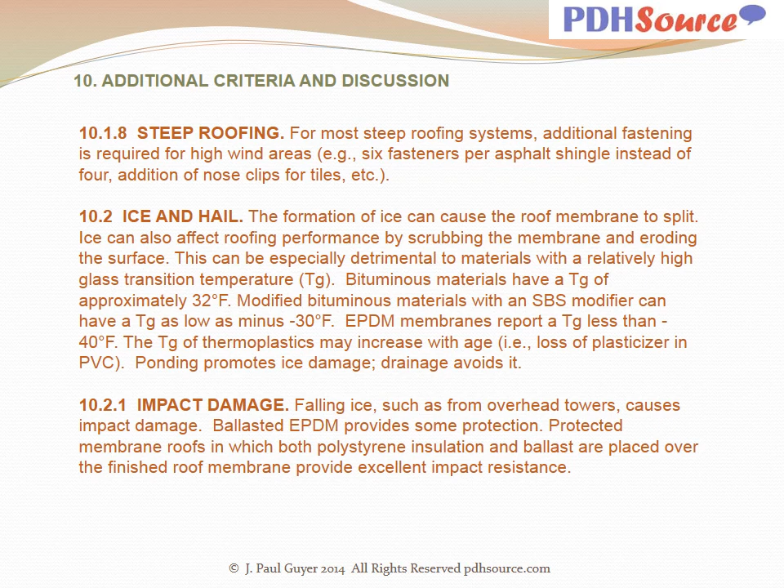Ponding promotes ice damage, drainage avoids it. Falling ice, such as from overhead towers, causes impact damage. Ballasted EPDM provides some protection. Protected membrane roofs, in which polystyrene insulation and ballast are placed over the finished roof membrane, provide excellent impact resistance.

Ice formation at eaves, scuppers, and gutters is a major design concern. For low-slope roofing, selection of internal drainage where building heat keeps the drain lines unfrozen is recommended. For metal and steep roofing, heating cables are sometimes necessary but not especially reliable.

Weather maps are available that generally divide the U.S. into regions that require resistance to severe hail, generally 2-inch diameter, moderate hail, 1.5-inch diameter, and areas of low hail probability. Hail resistance is affected by the compressive strength of the substrate, thickness of the membrane, tensile strength, and age and brittleness of the material.

Snow removal operations in which shovels or snow blowers are used can cause severe damage, especially to cold, brittle membranes. Smooth, single-ply membranes and metal roofing are extremely slippery when wet or when a thin ice film covers meltwater. Roof walkways consisting of compatible materials are essential when it is necessary to walk on wet or frozen roofs.

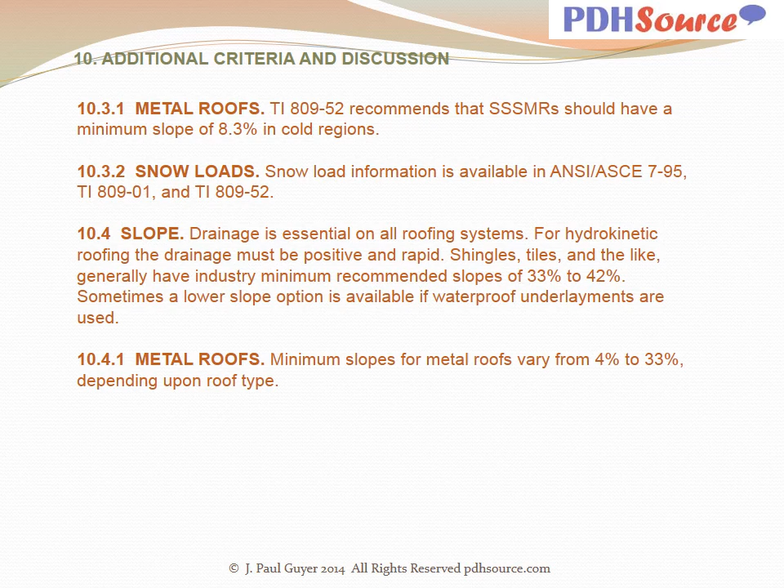Low slope membrane should also comply with minimum slope of 2%, quarter inch per foot. Where ponding is unavoidable, such as in spray ponds, a BUR with double poured aggregate and bitumen is sometimes used. Coal tar pitch membranes are used at slopes as low as dead level and to a maximum slope of 2%, quarter inch per foot. Drainage is also needed.

However, small puddles are inevitable as SPF is never completely smooth. Small puddles should dry out within 24 to 48 hours after inclement weather. Additional elastomeric coating is recommended where ponding is anticipated.

For sprayed in place polyurethane foam, SPF, systems, positive drainage is also needed. However, small puddles are inevitable as SPF is never completely smooth. Small puddles should dry out within 24 to 48 hours after inclement weather. Additional elastomeric coating is recommended where ponding is anticipated.

In re-roofing and recovering applications, correcting the slope to 2%, quarter inch per foot, is sometimes unfeasible because of low windows, flashings, etc. In these cases, tapered insulation at 1.5%, 3/16 inch per foot slope may be an acceptable compromise.

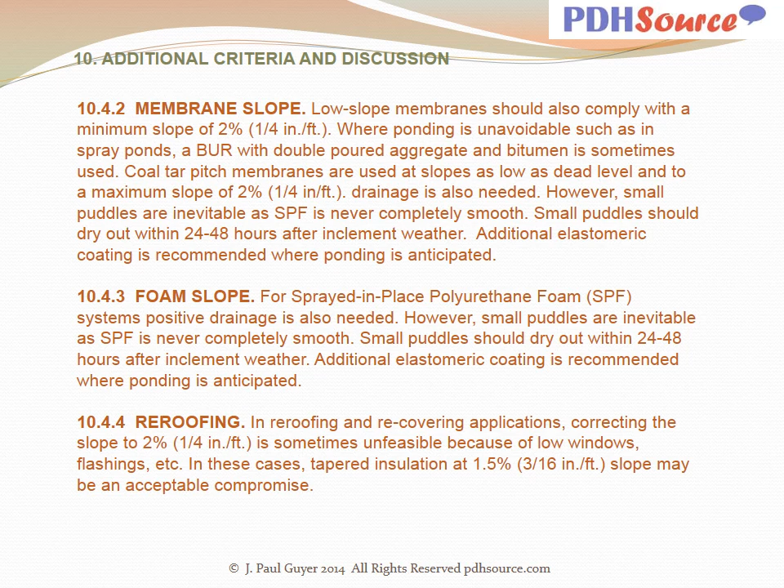Conversion of a poorly draining roof to a steep roofing system may be accomplished on a relatively narrow roof system built by installing new slope joists.

Moisture can be carried through materials by diffusion or by the movement of air. Air barriers are needed to reduce air movement. They can be located anywhere within the building envelope. Vapor retarders, when needed, must be placed within the warm portion of the thermal insulation.

For hot, humid climates, a reverse vapor drive may occur, especially in cooler and freezer buildings. In this case, the membrane and wall retarders should be sealed and continuous. Roof vents and breathing edge details must be avoided.

For freezer buildings, consider separating the roof system from the freezer. For buildings with high interior relative humidity, such as bakeries, laundries, pools, kitchens, dining halls with serving lines and the like, vapor retarders are considered essential.

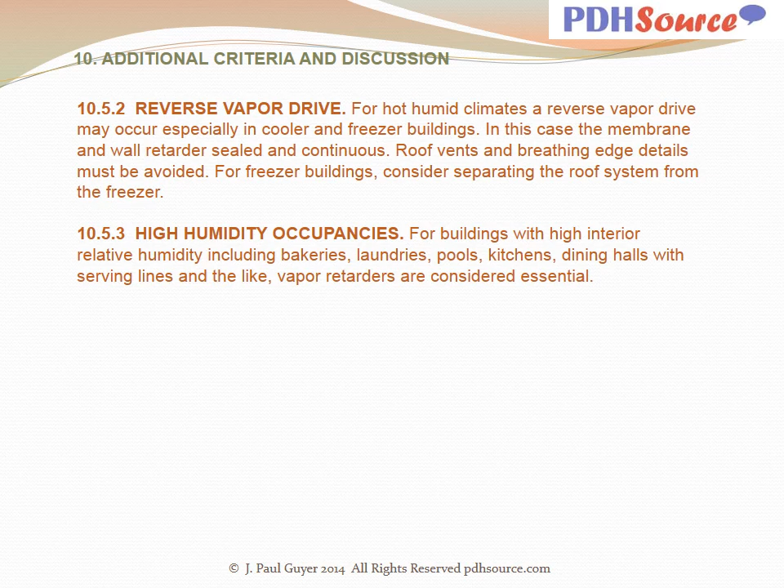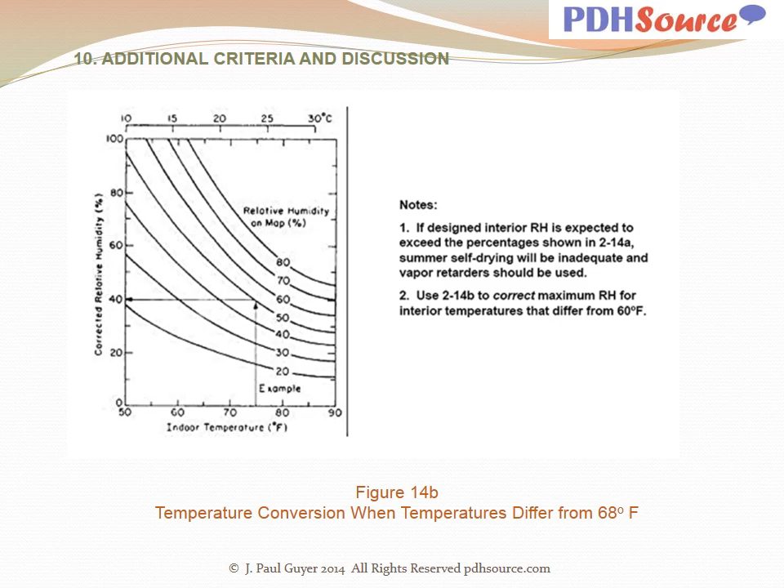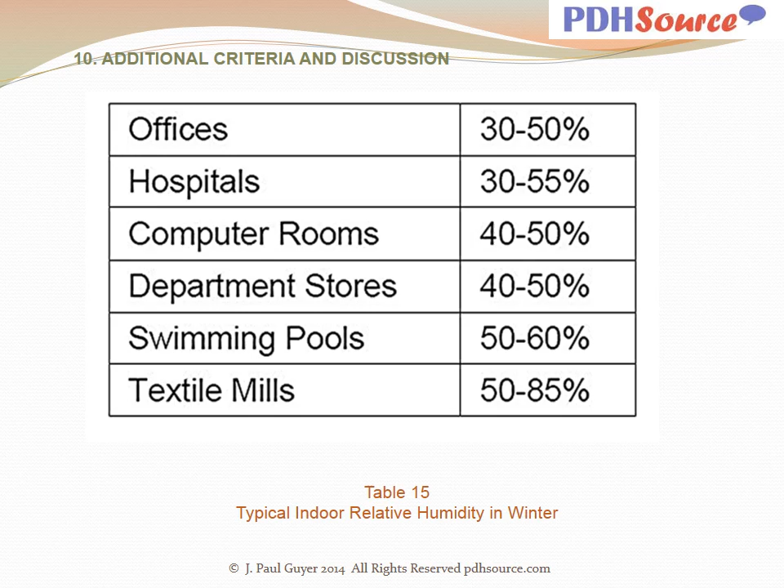Bituminous retarders are installed over solid fire barrier substrates such as concrete, gypsum board, or a fire-resistant insulation. Bituminous retarders have near zero perm ratings. For most membrane roofing systems, vapor retarder permeance shall be below 0.5 perms. Perm ratings for various vapor retarder materials can be found in the ASHRAE Handbook of Fundamentals as well as in industry literature.

Non-bituminous single-ply systems may use plastic films as vapor retarders. These can be successful if the seams and penetrations are carefully sealed with tape. Puncturing the retarder, either accidentally or by installing mechanical fasteners, lessens its resistance to moisture.

Protected membrane roofing systems, PMRs, are very effective against vapor drive from within the building. The roof membrane itself serves as the vapor retarder, as most, if not all, of the thermal insulation is located above it. Self-drying of the insulation, extruded polystyrene, to the atmosphere maintains the thermal resistance.

SPF systems are commonly installed on recover installations where the old bituminous membrane can be sealed to form a retarder. Dew point calculations are necessary to ensure the dew point is within the upper SPF layer.

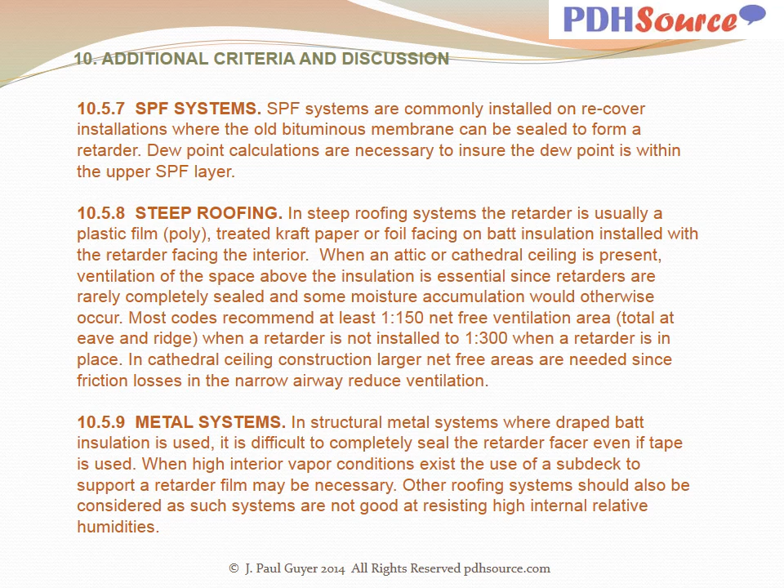In structural metal systems where draped batt insulation is used, it's difficult to completely seal the retarder facer even if tape is used. When high interior vapor conditions exist, the use of a subdeck to support a retarder film may be necessary. Other roofing systems should also be considered, as such systems are not good at resisting high internal relative humidities.

Thermal insulation is important in modern buildings both for energy conservation and human comfort, and may impact the roof membrane performance. Resistance to heat flow through the entire roof structure, characterized by the R factor, should be as high as possible, as both practicable and cost effective, and in general the R factor should exceed 20. The U factor, the reciprocal of the R factor, should be 0.05 or less.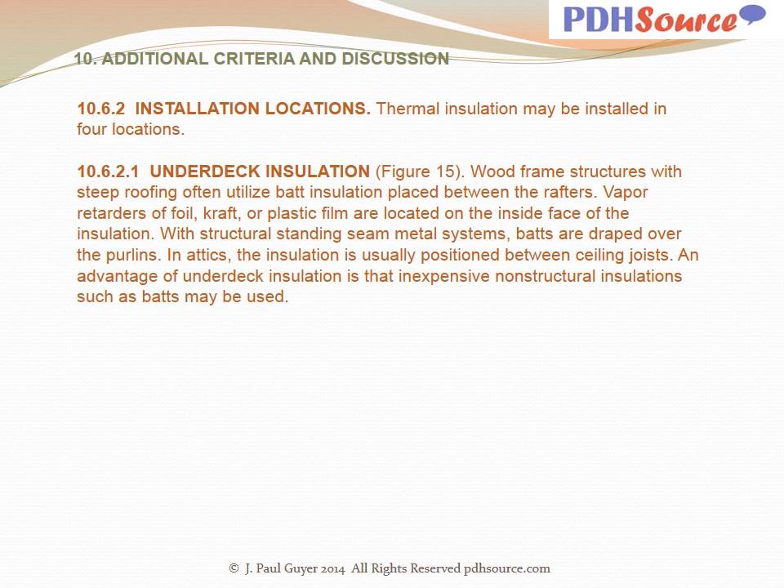In attics, the insulation is usually positioned between ceiling joists. An advantage of underdeck insulation is that inexpensive non-structural insulations such as batts may be used. Figure 15 indicates a typical underdeck insulation installation.

A disadvantage is that the roof deck suffers greater thermal stress than when it is overlaid with insulation. Another disadvantage is that it's difficult to vapor seal such construction and make it resist air exfiltration, and as a result moisture problems are prone to occur.

Ventilation is usually required, but ventilating low-slope framed roofs lacking tight air barriers is apt to increase moisture problems, not eliminate them. Common underdeck materials include compressible batts of glass fiber and mineral wool.

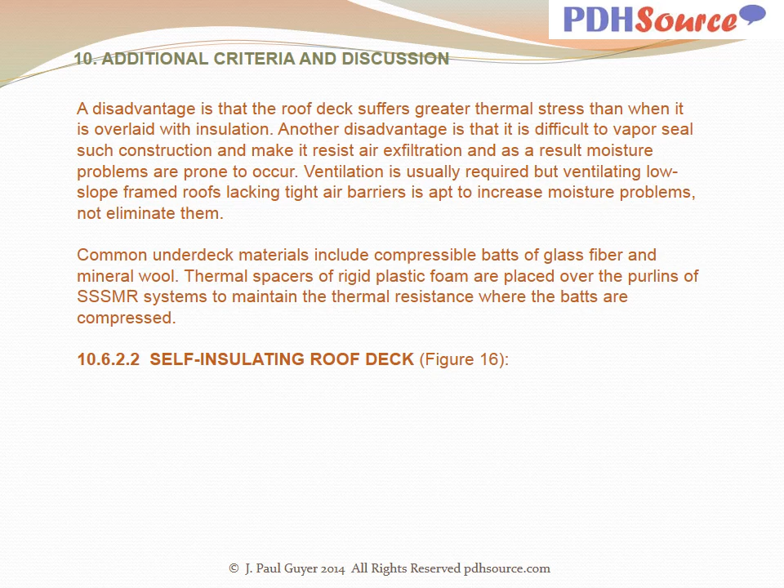Thermal spacers of rigid plastic foam are placed over the purlins of SSSMR systems to maintain the thermal resistance when the batts are compressed. For self-insulating roof decks, refer to Figure 16.

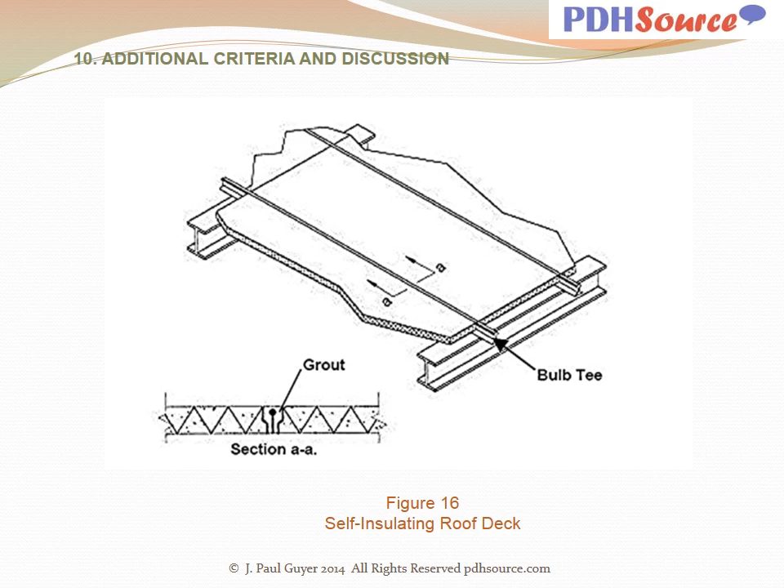Figure 16 indicates a typical self-insulating roof deck system. Insulating decks such as structural wood fiber are less popular today because it is difficult to achieve high R values within the deck itself. In re-roofing situations, supplemental insulation would often be added on top of such a deck.

In some new assemblies, a composite of structural wood fiber topped with plastic foam is used. The underside of these self-insulating decks can be exposed to the interior and serves as an attractive acoustical ceiling. With regard to thermal insulation within the roofing sandwich, refer to Figure 9.

Common materials for adhered systems include faced polyisocyanurate foam, perlite, rigid glass fiber boards, wood fiber, and cellular glass. Verify that the combination of membrane and roof insulation/facer are fire and wind rated.

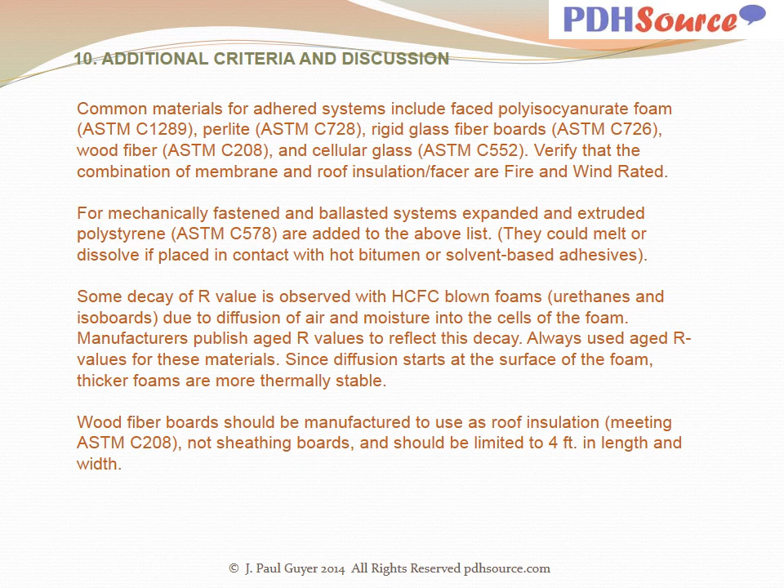When mechanical fasteners are used to secure thermal insulation, it is recommended that the nail one, mop one technique be used. This minimizes thermal bridging and avoids nail popping of the membrane. When multiple layers of insulation are used, vertical joints should be offset to reduce heat losses. Straight through joints can take away 10% of a roof's insulating ability.

With regard to protected membrane systems, in PMR systems, only extruded polystyrene is suitable in the sometimes wet environment above the completed roof membrane. This insulation protects the membrane from thermal stress and abuse. Ballast and filter fabric is needed to hold the loose-laid insulation in place. Figure 17 indicates a protected roof membrane system.

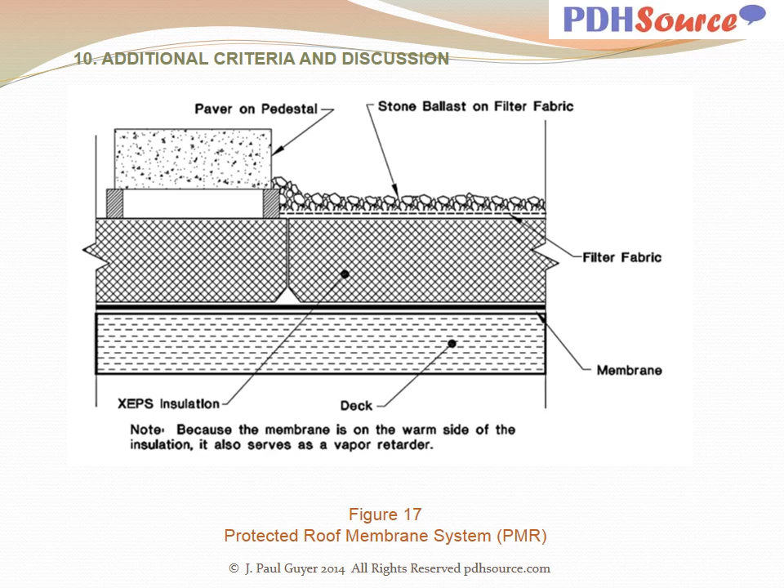The ratio of roof area on a low-rise commercial building is high relative to wall area. Such roofs can provide a great opportunity for energy conservation. This can be accomplished by using well-insulated high thermal mass structures to reduce summer cooling loads, garden roofs, or high albedo roof coatings. For roofs in hot or temperate climates, light-colored roof surfaces reduce heat gain.

For membrane roof systems, light-colored aggregate, gravel-surfaced roofs, or mineral granules and MB cap sheets reduce maximum surface temperatures by up to 35 degrees Fahrenheit over black membranes. Aluminum coatings are approximately the same, while white coatings have been observed to reduce temperatures by more than 45 degrees, provided that the roof stays clean.

The use of pavers and heavy ballast reduce heat gain through thermal lag, that is, the high heat capacity stores some of the gained heat, delaying the startup of the building's air conditioning system.

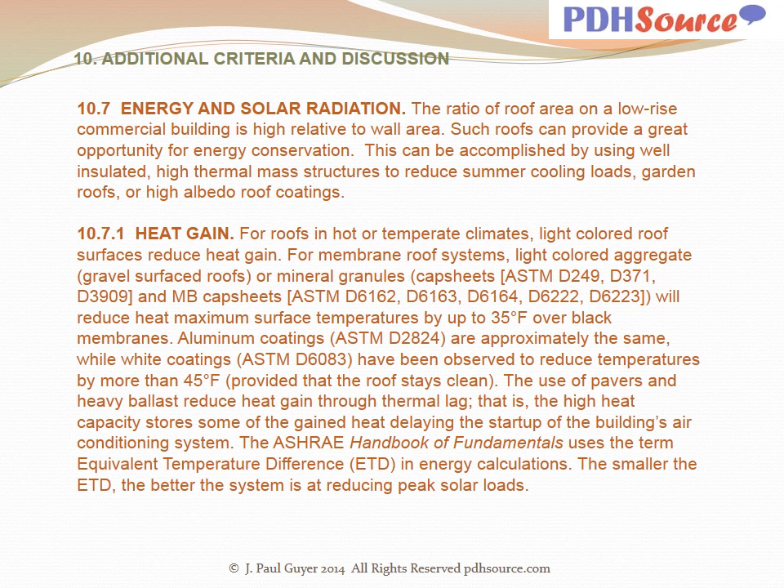With regard to fire considerations, topside fire ratings, because of its large surface area, roofing plays an important role in fire protection. Fire hazards can be defined as external, where the source is outside the building, such as from wind-blown flaming debris. Tests for external fire resistance are referred to in building codes as Class A, B, and C. An external fire rating is established by constructing and testing roofing assemblies by methods described in ASTM E108, also known as UL 790. In this method, relative degrees of fire resistance are established.

Class A roof coverings are effective against severe fire exposures. Under such exposures, roof coverings of this class are not readily flammable and do not carry or communicate fire. They afford a fairly high degree of fire protection to the roof deck, do not slip from position, possess no flying brand hazard, and do not require frequent repairs in order to maintain their fire resistant properties.

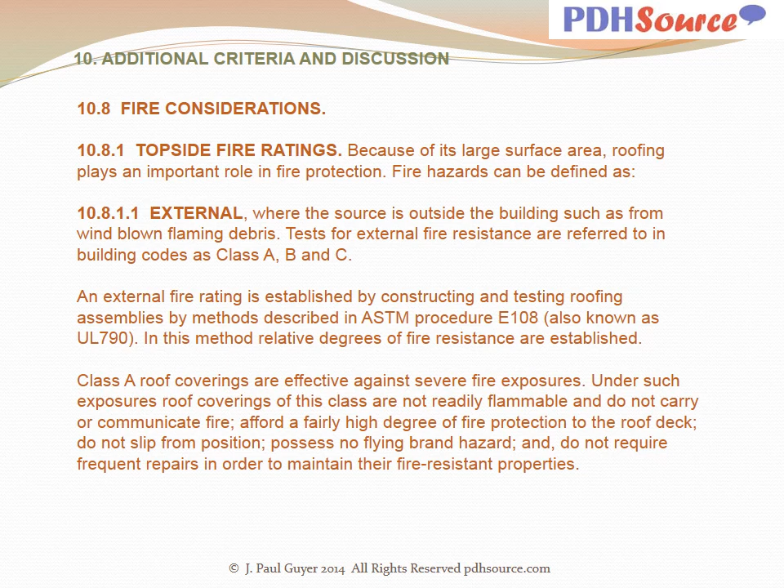Class B roof coverings are effective against moderate fire exposures. Under such exposures, roof coverings of this class are not readily flammable and do not readily carry or communicate fire. They afford a moderate degree of fire protection to the roof deck, do not slip from position, possess no flying brand hazard, but may require infrequent repairs in order to maintain their fire resistant properties.

Class C roof coverings are effective against light fire exposures. Under such exposure, roof coverings of this class are not readily flammable and do not readily carry or communicate fire. They afford some degree of fire protection to the roof deck and do not slip from position. They possess no flying brand hazard, and they may require occasional repairs or renewals in order to maintain their fire resistant properties.

Class A, note, does not mean grade A. In this classification, only fire performance is considered. A specifier should select the degree of fire resistance required, but recognize that selecting a higher rating does not assure better waterproofing nor longer life. In fact, some compromise in durability may have been made to meet the higher fire rating.

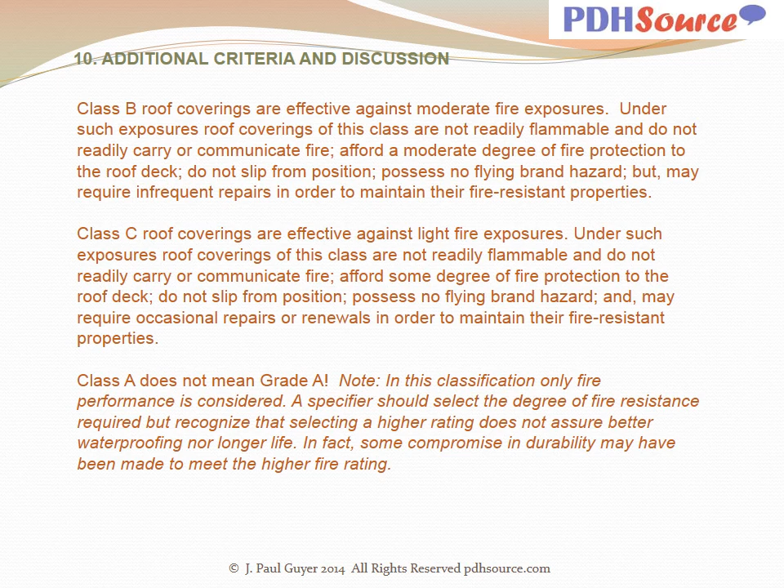ASTM E108 fire tests may be conducted on steep roofing, membrane roofing, SPF, and metal panels. Listings of systems that meet these requirements are found in the Underwriters Laboratories Roofing Materials and Systems Directory and the Factory Mutual Approval Guide, and reports and directories published by several other qualified testing agencies.

Qualified listings: if a roofing assembly fails to meet burn-through requirements of ASTM E108, it may still be listed for use with non-combustible decks such as steel, concrete, and gypsum. Roofing assemblies are listed at the maximum incline to which the rating applies, as long as the structure under consideration is at a lower or equal incline to that listed. It complies with the fire rating.

If a listing is intended for use as a roof superimposed over an existing roof, it shall be listed in the UL Roofing Materials and Systems Directory under the category Maintenance and Repair Systems. In the Factory Mutual Approval Guide, it will be listed as a recover.

In general, only the materials listed qualify, and only when used in the manner described in the directories. Additional insulation, for example, may worsen the flame spread.

An internal underdeck fire is when flame spread occurs underneath the roof deck. Listings are referred to by approval rating, usually Factory Mutual Class 1, or Underwriters Laboratories Insulated Metal Deck or Non-Metallic Decks Construction.

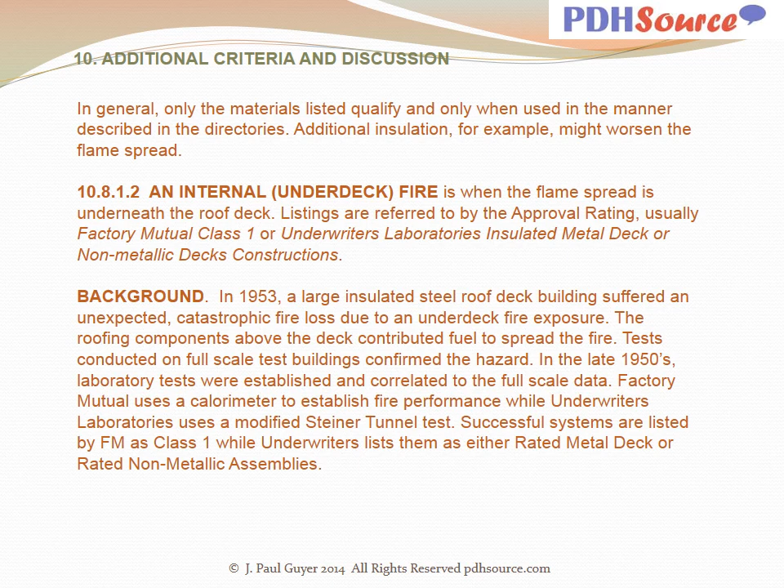The underdeck ratings do not assure zero risk. The ratings assume an acceptable risk, assuming normal fire detection and fire control procedures are available.

If an insulated steel deck system fails to comply with the requirements of Factory Mutual Class 1, it is designated Class 2. Class 2 constructions may be converted to Class 1 by the addition of underdeck fireproofing.

Class 2 constructions may also be acceptable if an approved sprinkler system is used.

Fire endurance tests are time-temperature tests per ASTM E119, in which the roof ceiling assembly is subjected to a rising heat load until either the interior structural elements yield or the temperature on the exterior roof system reaches 250 degrees Fahrenheit above ambient.

The minimum elapsed time required before the endpoint is reached is usually established by building code or occupancy, i.e. 1 hour, 1.5 hours, etc.

Rated assemblies are listed by Underwriters Laboratories in their fire resistance directory and by Factory Mutual in their approval guide. Other testing agencies list rated assemblies in their directories as well.

Assure that fire compliance ratings pertain to the entire assembly. Each component of the system must be listed in the above directories. Materials delivered to the job site should bear labels indicating compliance with the construction intended. The label also provides third-party assurance that the products delivered to the construction site are essentially unchanged from those tested and listed.

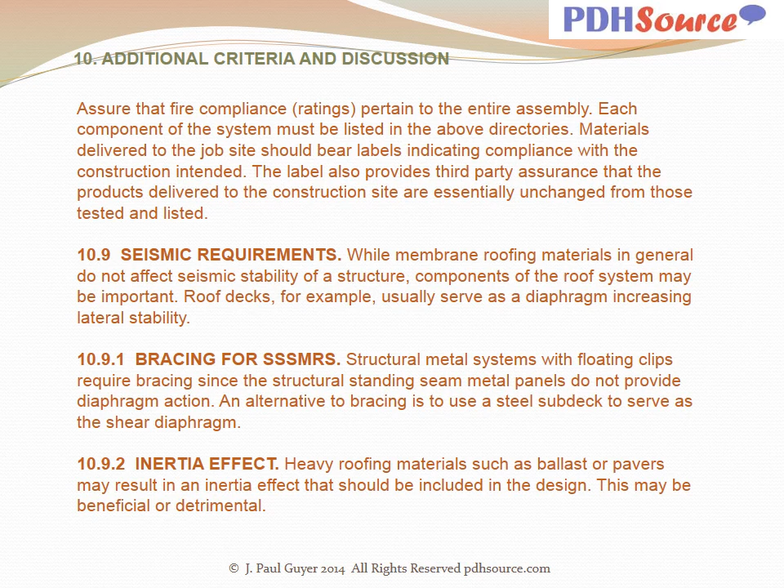Heavy roofing materials such as ballast or pavers may result in an inertia effect that should be included in the design. This may be beneficial or detrimental.

In steep roofing, seismic motion may shatter materials such as cement and clay tile. Correct use of mechanical anchors may prevent damage. Twisted wire systems are recommended for earthquake zones.

The National Tile Roofing Manufacturers Association requires 2 nails, or a nail and a clip, on every tile to resist seismic damage, for restraining of roof tiles.

Title 24, a California code, addresses the attachment of tiles and allows the combination of wire tie and nose clips, wind locks, or tile locks.

Nails or wire ties are to be copper, brass, or stainless steel, 11 gauge minimum, with 2 per tile. Nails are to penetrate roof sheathing, battens, or support members, 3/4 inch minimum. Ring shank nails may be used when sheathing thickness is less than 3/4 inch.

Parapet walls must be used with care. Through-wall flashings or cut reglets must be avoided, as they reduce the wall's resistance to lateral forces.

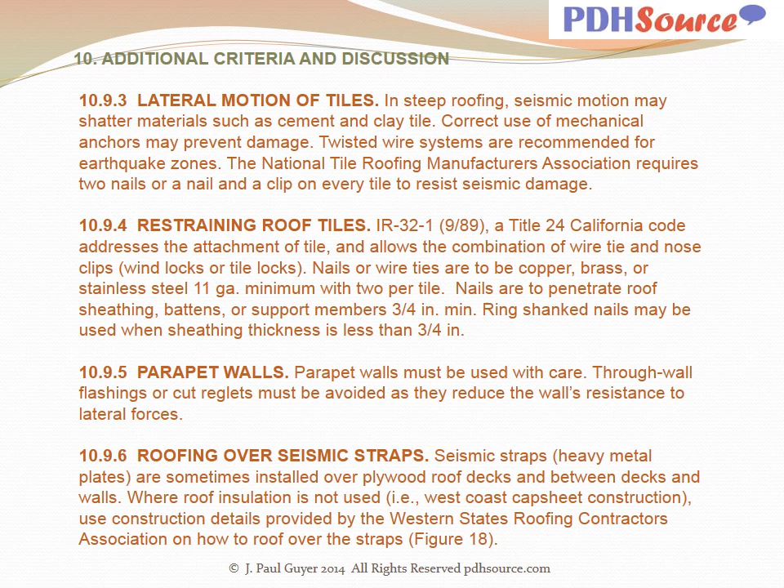Seismic straps, heavy metal plates, are sometimes installed over plywood roof decks and between decks and walls. Where roof insulation is not used, i.e. a West Coast cap sheet construction, use construction details provided by the Western States Roofing Contractors Association on how to roof over straps, indicated in Figure 18.

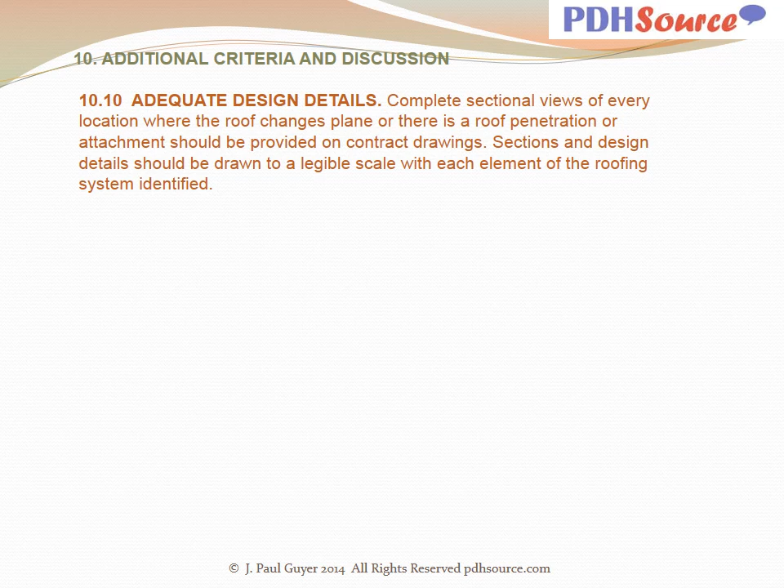Complete sectional views of every location where the roof changes plane or where there is a roof penetration or attachment should be provided on contract drawings. Sections and design details should be drawn to a legible scale with each element of the roofing system identified.

And that brings us to the conclusion of this brief discussion of roofing systems. I hope this was about what you were looking for, and that this will give you a little bit of technical guidance that you can use on projects as they come across your desk in the future.